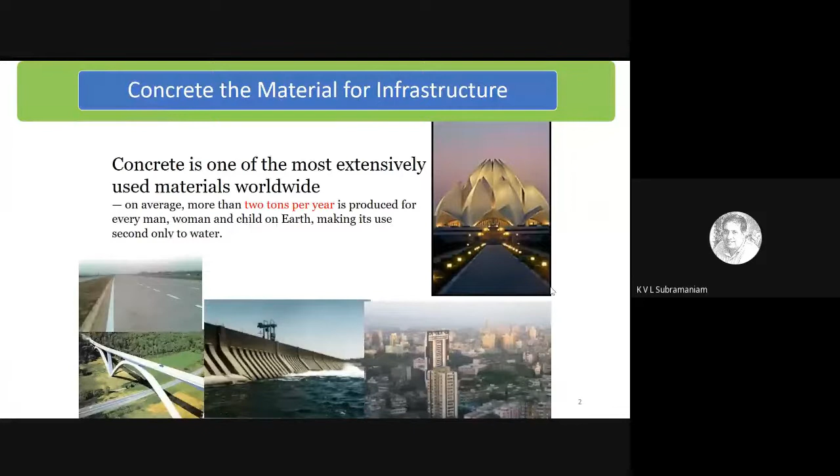Basically, if you look at concrete, it's everywhere. The usage of this material is more than 2 tons per year for every human being on this planet. So it is second only to water. So this is a material that we have to produce. We have to continue to produce in order to sustain our growth of infrastructure.

Now, oftentimes when we talk about cement and concrete, these two terms are used in an interchangeable manner. Even in civil engineering literature, it's not unusual to see cement and concrete being used interchangeably. But we have to realize that cement is, of course, only a component of concrete. We have aggregate also that come into play. And of course, now even admixtures make up a good chunk of concrete.

And if you actually look at it, cement only makes up about 7 to 15% of the total mass of concrete. But it is the most key ingredient because this is that one ingredient that is responsible for strength. It is responsible for all the durability properties of concrete. So a little perspective on cement. We are not new on the scene. We think we've invented the world, but we have not.

Romans had quite an advanced technology of cement. To this day, we don't know if it was done in a scientific manner, by trial and error, or if they basically stumbled upon it. But the Roman concrete, as we are starting to look into the historic structures built by the Romans, basically has a very similar composition to what we are using in modern concrete. They were using hydraulic cements, which would react in water, set, and basically give the properties.

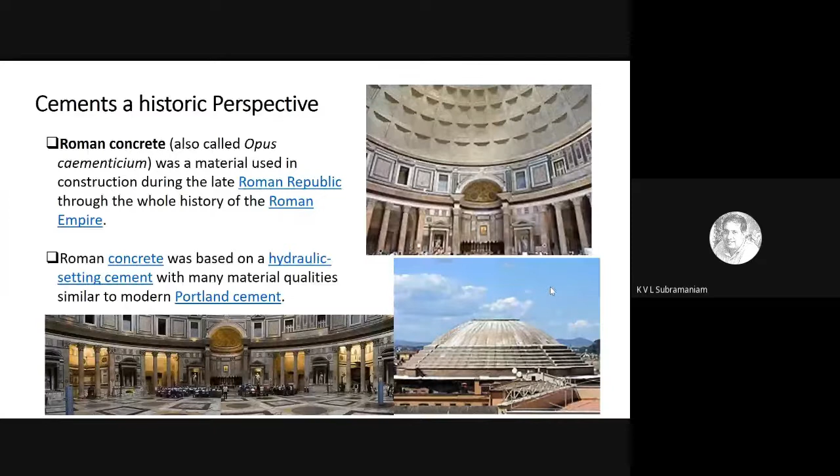So they basically had mastered the technology, and for almost 2000 years, nothing much happened. In fact, if anything, we slipped backwards in terms of cement and concrete. And the other thing that we keep coming across in terms of utilization of waste materials is the Roman concrete. They used aggregate, and they also had mortars. They had a binder, and they also came up with this term pozzolana, which has become very common in usage today.

It has been traditionally used even in India. Practically everything that was built up to almost 100 years ago was made with lime mortar.

It's a very simple chemistry here. You take limestone, which is basically calcium carbonate, and heat it to 1000 degrees, essentially calcine it. That breaks up into calcium oxide, which is what we call chunna or lime powder, and you mix it with water. That turns into a paste, which is calcium hydroxide. When that reacts with carbon dioxide in the atmosphere, it gives off calcium carbonate. So you start with a rock, and you end up with a rock. What happens is you apply this lime between bricks or stones, and as it hardens and forms calcium carbonate, it binds these materials together.

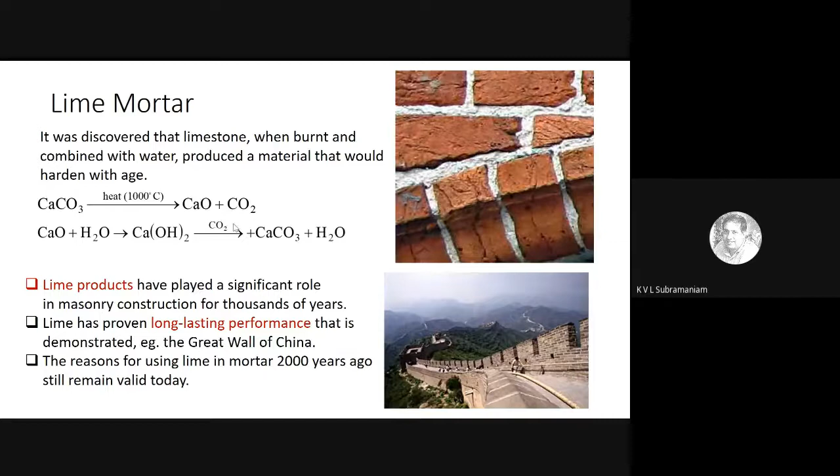Again, if you look at lime mortar, that's a calcium product. So the two things we have to pay attention to are calcium and silica. These are two important elements that we need to pay attention to when talking about cement.

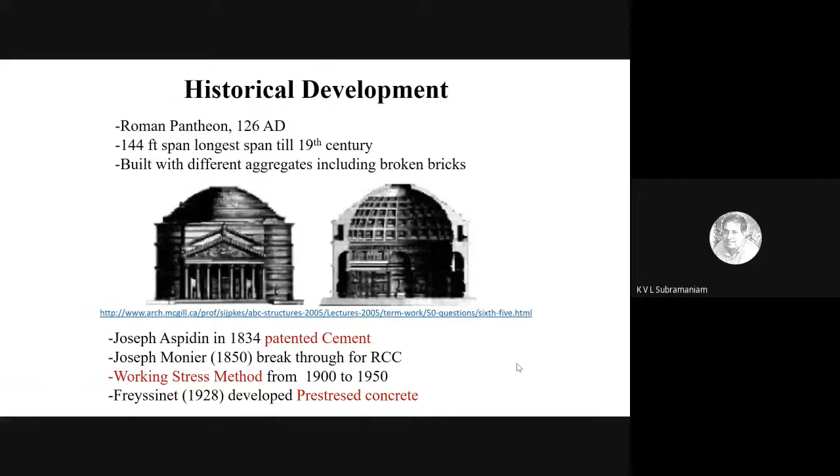Now, if you look at the historic development of cement, we look back to the Roman Pantheon, which is 126 AD, and some other developments that have happened. But the first systematic procedure for making Portland cement was patented in 1834 by Joseph Aspdin. Then, of course, subsequent developments happened while we were able to make cement and concrete. By the time design methods came about, that was in the early 1900s, and now we are able to take it further with the use of pre-stressed concrete. So these are all the developments that have happened with the use of the material.

Now let me talk a little bit about cement manufacture. We need to understand the chemistry of this material. If you look at modern cements today, primarily they are calcium oxide and silica. These are the two prime ingredients in cement.

Calcium oxide typically makes up about 60 to 70%. Silicon oxide, and I'll just loosely call it silicon oxide—we'll see later that we need to understand really what this silicon oxide is—makes up anywhere from 20 to 25%. So these are the two primary ingredients that make up modern cement. The calcium and the silica keep coming up again and again. Even in modern day cements, it's calcium and silica, and the primary components are calcium silicates in cement. So basically, cement chemistry is all about understanding calcium silicate chemistry.

Now, as I had mentioned before, in the manufacture of cement, if I have to produce a calcium silicate, I need sources of material that can give me calcium and silica. This has not changed, so if you look at limestone, it's still the source that we use for calcium.

This is similar to what was used in lime mortar for 2000 years. Silica comes from sources like clay, which basically brings in the silica. So these are the two raw materials which bring in the calcium and the silica that are needed to make cement, so that we can produce a calcium silicate material.

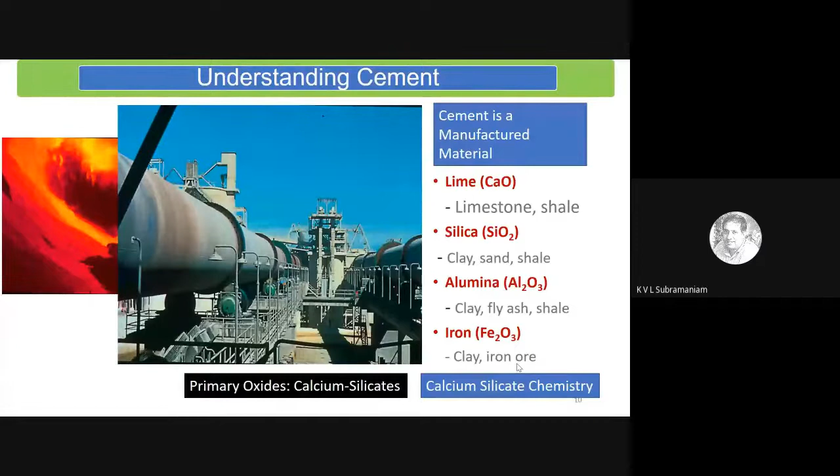The manufacture itself requires heat and energy, similar to what was done with lime mortar. You have to free up the calcium from the limestone. The cement manufacture takes place in these rotary kilns, which are massive drums. I'll show you photographs of these. The raw material, limestone and clay, is added into a hopper, and the material comes into this kiln. I'll show you what is happening in the kiln in the next slide.

If you look at limestone and heat it up, it gets calcined, a process similar to what we did with lime mortar. It breaks up into calcium oxide, giving me the calcium I need for making cement. I also add clay as my other raw material, which brings in the silica, alumina, and iron elements, the three primary elements that come from the clay.

As I heat the calcium oxide and the clay together, the calcium fuses with the silica, and I get calcium silicate. Because I also have alumina and iron, I get calcium aluminate and calcium aluminoferrite phases. These are what we call Bogue compounds in cement chemistry. What comes out is clinker, which is then ground with gypsum to produce cement.

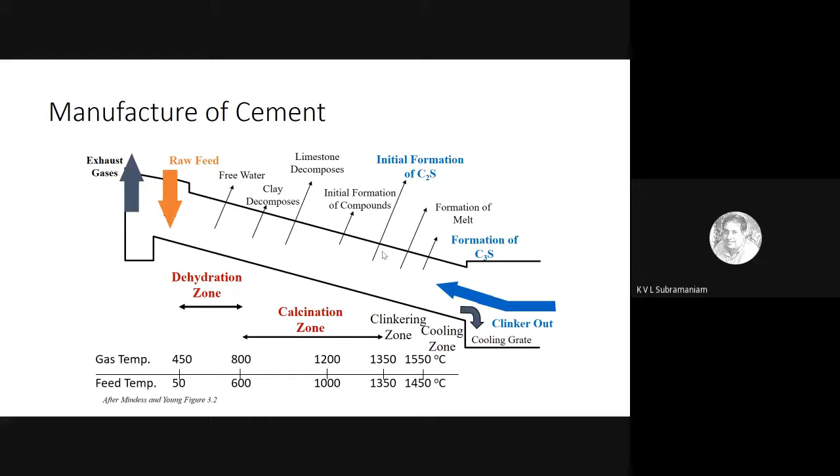Then the limestone decomposes, and I get calcium oxide. As the charge starts moving forward, the calcium oxide and the silica start fusing. At around 1200 to 1350 degrees Celsius, I form C2S, which is dicalcium silicate. Tricalcium silicate is formed at a much higher temperature, close to about 1450 degrees Celsius. So I get these primary silicates, C2S and C3S, that form as the charge moves forward through this drum, and eventually the clinker is discharged at the opposite end of the drum.

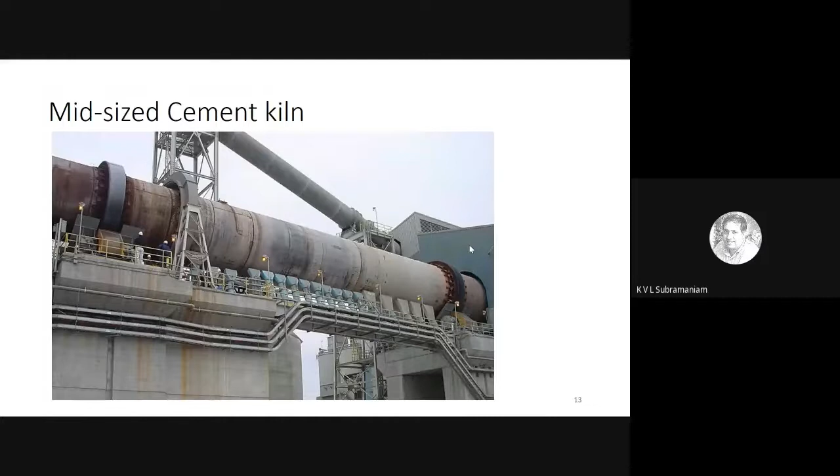So now one of the ways some of the waste material is being disposed of is happening right in cement manufacture itself.

Similarly, biological and hazardous waste is also being used in incineration to produce the temperature. So in the production of cement itself, a lot of this hazardous and waste material disposal is already happening.

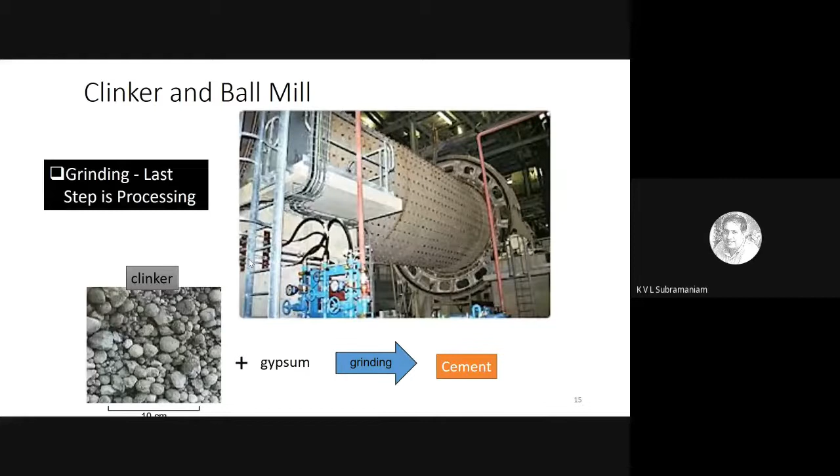Now after the kiln, what comes out is clinker, and you see the clinker is basically in the form of these nodules, grayish stone-like material, which is then ground in a ball mill to produce a very fine material, which we call cement, this grayish powder. In the grinding stage is where we add gypsum to produce cement. What comes out as cement is this grayish powder, the ordinary Portland cement, as we call it.

It has an average particle diameter of anywhere from 10 to about 20 microns, or micrometers, and a very high surface area. There's a whole science into the grinding process, achieving these sizes, and the role of particle size in the reaction of the cement.

Now just a quick touch on the embodied energy. If you look at the energy used to produce cement, how much energy do I have to expend, and compare it with other materials, actually OPC doesn't look so bad. If you compare it with aluminum, which probably has the highest embodied energy because the electrolysis process used to produce aluminum is very, very energy intensive, it has a very high thermal energy requirement. Even steel is high.

The OPC that we talk about is actually not so bad. While it is an energy intensive material, it is not as bad compared to other materials. That's one of the things one has to think about when discussing the sustainability of this material, because with all said and done, compared with other construction materials, it has probably the lowest embodied energy.

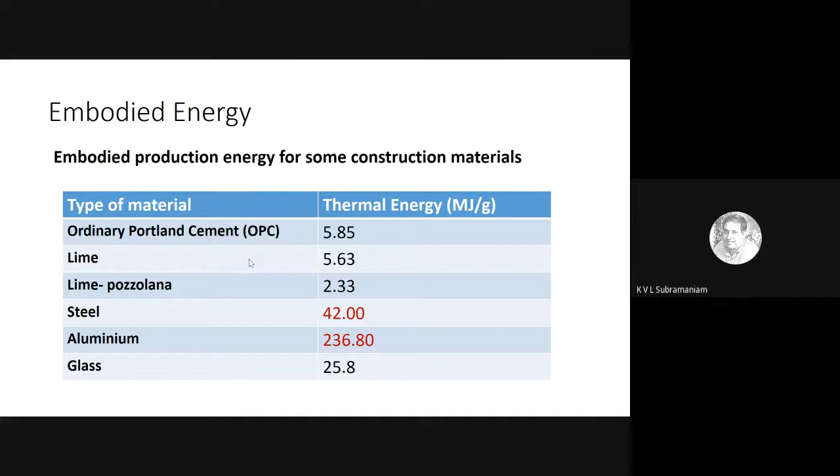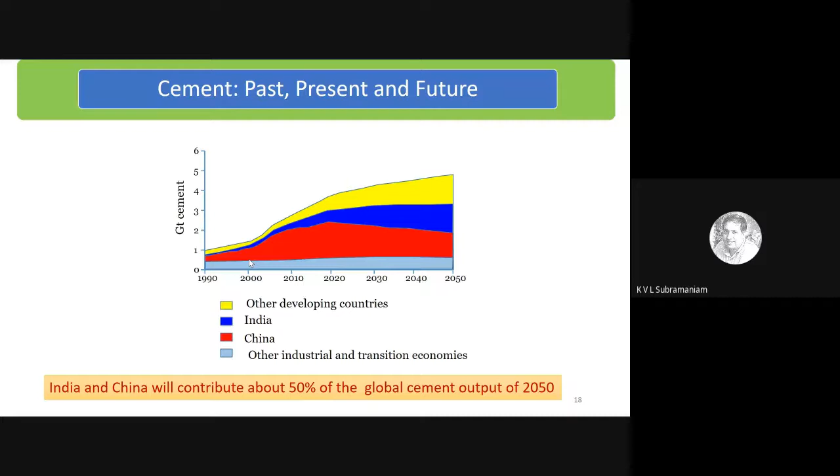Now, the blue there is India. India right now is the second largest producer of cement, and if you project forward to 2050, it will likely be the largest producer of cement. That is a projection based on our requirement of cement for infrastructure. As we are planning to grow our infrastructure, we'll need a lot of cement, so we have to be able to produce the kind of cement to sustain the growth of our infrastructure.

Now, what are the challenges with cement production? With the anticipated requirement of 750 million tons per annum in 2050, our current available reserves of limestone are expected to last only about 35 to 40 years. This is the grade A limestone, the best quality limestone currently used in making cement. That's only going to last us 35, 40 years, which means we have to look for alternatives.

So we have to look at reducing the amount of clinker in cement, because clinker is the one that comes from the use of these raw materials. Although the energy requirement of cement is less compared to other construction materials, given the large volume in which cement is required, we have to address the energy issue and the carbon footprint. It is the second or third largest anthropogenic source of carbon dioxide. We have to address this issue.

So to make any improvements, first we have to go back to the basics. Let's look at cement hydration and cement chemistry. The two primary compounds responsible for most of the properties in cement are the calcium silicates, tricalcium silicate and dicalcium silicate. These react with water in a reaction we call hydration to give calcium silicate hydrate, and a lot of lime or calcium hydroxide is released in the process.

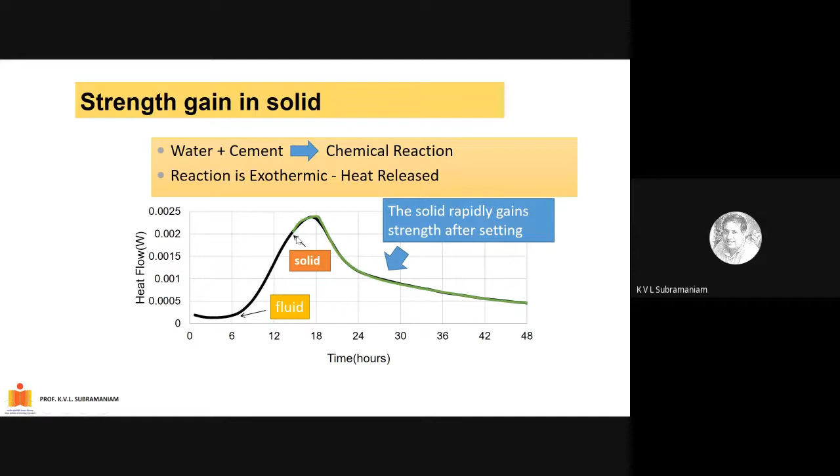In fact, they go down in size to a few nanometers and fractions of nanometers. So you get these small water-filled capillaries which go from nanometers up to micrometers. With time, as more and more cement reacts, water is consumed, and the capillary pore space starts decreasing.

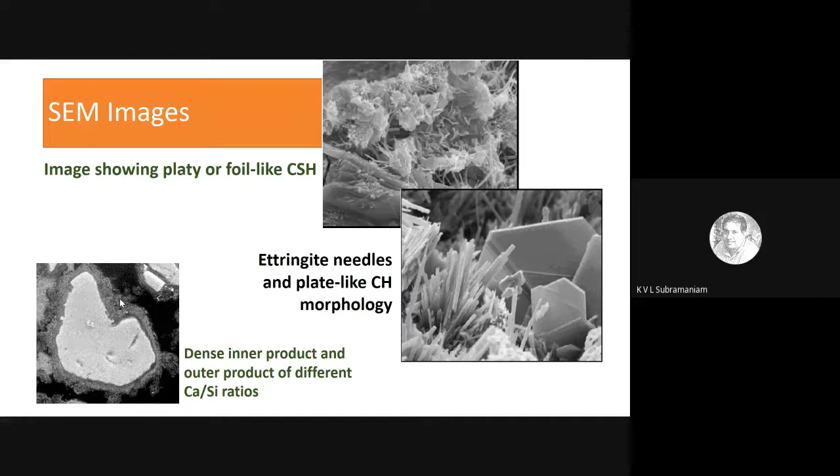If I sample the calcium silicate hydrate close to the cement grain, it will have a certain composition. If I sample it away from the cement grain, it will have a different composition. And the way it is packed also varies. This has enormous implications on the final strength, the final properties of the hydrated cement, and also of the concrete. So a quick touch on supplementary cementitious materials.

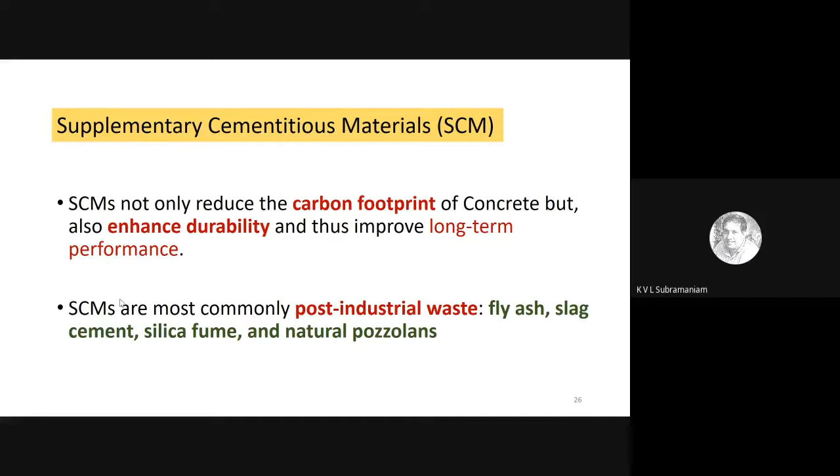Now, because we are trying to reduce our requirement of cement, we started exploring supplementary cementitious materials, which are primarily derived from post-industrial waste. The supplementary cementitious materials most commonly used today are fly ash, slag, and of course silica fume, and these are all waste materials.

Now, what is fly ash itself? I'll cover this in a little more detail in the next few slides. It's basically what we get when we burn coal, the ash that is left behind. This is the ash that is collected from the stack, what is coming out of the chimney. It's carried by the flue gas, it's in the form of fine dust, and it's collected using electrostatic precipitators.

The way we use these supplementary cementitious materials is in a cement system. I have my cement reaction between the calcium silicates and water, which leaves a lot of lime. So we look at these supplementary cementitious materials, which are primarily sources of silica. Whether it is slag, fly ash, metakaolin, or silica fume, all of these are rich in silica. So these bring in the S element in the reaction.

Because the cement hydration leaves CH, which is calcium hydroxide, if I bring in a source of S, silica, in the form of either fly ash or slag, that would consume this CH and give me additional CSH. And this is what we call the pozzolanic reaction. So again, it goes back to having a system which has calcium and silica, and we are bringing in additional silica from these materials.

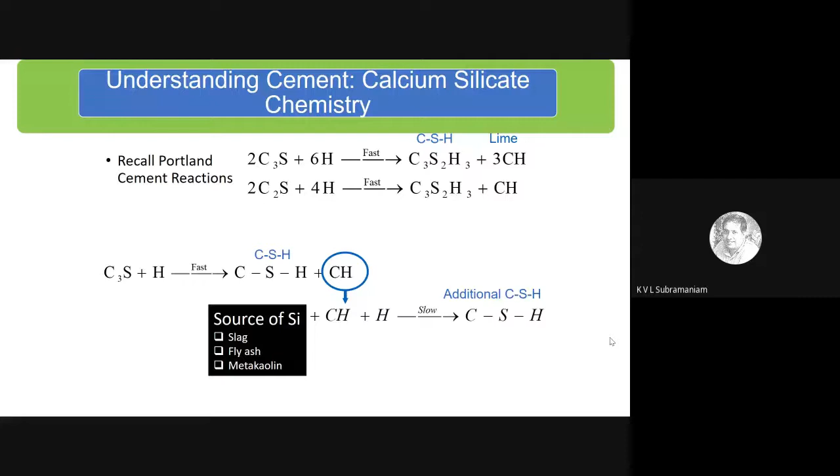And fly ash, if you look at its oxide composition, depending on the coal that is burnt to make the fly ash, contains a variable amount of silica, SiO2. That is the primary ingredient we count for when we are looking to replace cement with this material. Now, slag is another supplementary cementitious material that is made from waste.

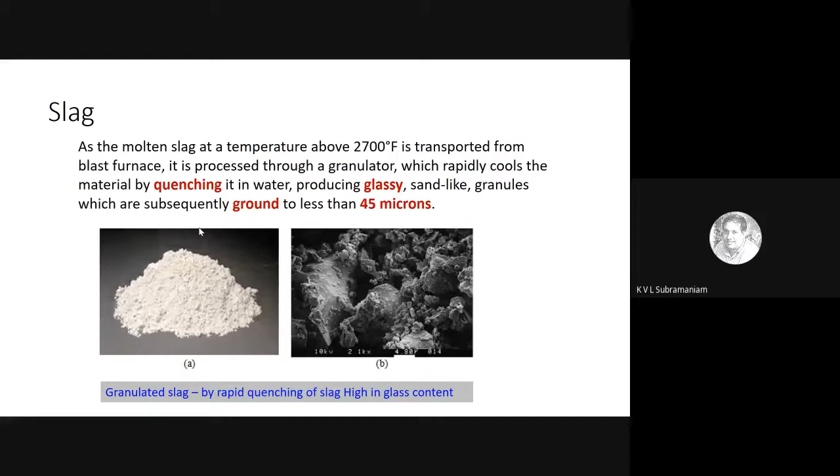It is basically the gunk that floats on top of the molten iron. That material is at a very high temperature of 2700 degrees Fahrenheit, about 1500 degrees Celsius, and it is cooled or quenched very quickly to give a glass-like material, which is then ground to a fine size to produce ground granulated blast furnace slag, which we use as a replacement. Again, this is very rich in silica, so it's primarily a source of silica.

Then we have silica fume, which is a byproduct of the reduction of high quality or high purity quartz in an electric furnace.

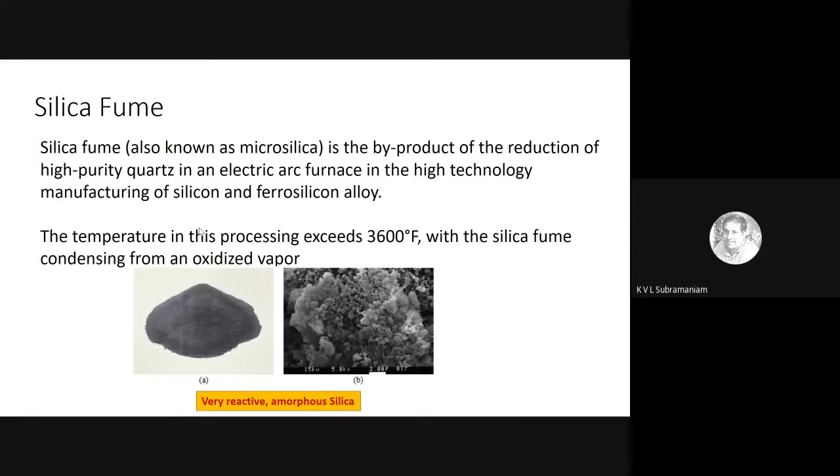Silica fume is used in the high technology manufacture of silicon or silica chips. It is very rich in silicon or silica, and it is again used as a supplementary cementitious material.

Metakaolin comes from calcining clay, and as we already know from our understanding of cement production, clay contains silica. So when I calcine it, I'm basically creating a source of silica in the system. And again, it can also be used as a cement replacement.

And the whole point is that the calcium hydroxide that is produced from the cement hydration is then used up by the silica that is coming from these materials to form additional calcium silicate hydrate. So that is the whole principle of this utilization.

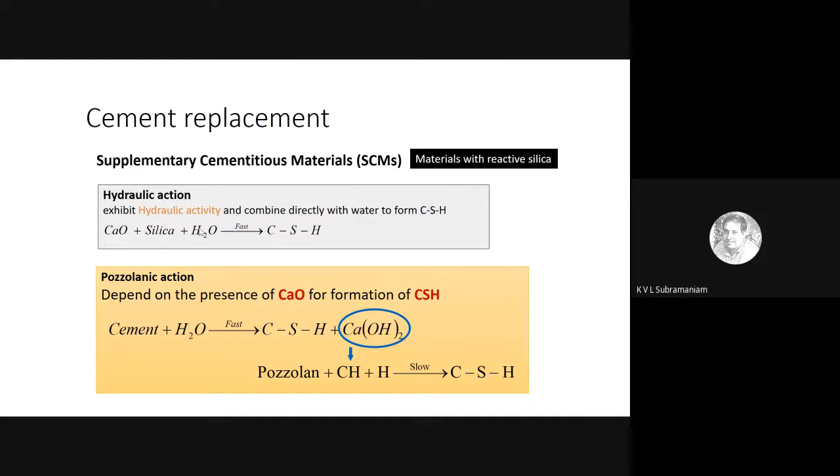And using this, we have been able to basically replace the clinker content in our cement with this post-industrial waste. And remember that fly ash and slag and silica fume, these are all waste materials produced by other industry. Therefore, they are post-industrial waste materials. We've been able to find uses for these materials in cement, primarily as a clinker replacement.

But I want to, at this point, develop an understanding of forms of silica. And this becomes very important in order for us to understand how effectively we can replace cement with these materials. Because we are primarily trying to replace the silica component, because these materials are bringing in silica. And we should be aware of what forms silica takes.

Now, if you look at silicon, it exists in oxide forms, and we are aware of different forms of silicon oxide. And one of the forms is quartz. Quartz is nothing but sand. It is our natural sand. And quartz is one of the most inert materials known to man.

It does not react. But at the same time, silica is also present in cement. It is also present in the supplementary cementitious materials. And somehow we know that this silica is able to enter into the reaction, which means that it is not inert. It is in a reactive form. So we have to learn to distinguish between the oxide forms of silica, and that takes us into silicon chemistry and silicon oxide forms.

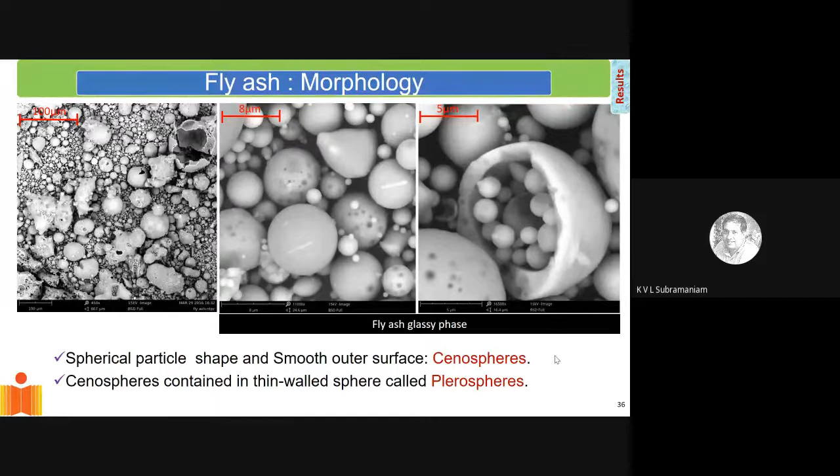Now, I'll illustrate this with fly ash. And I know you had a lecture yesterday given by Dr. Bhagat Singh, where he probably would have talked about fly ash in detail. I just wanted to illustrate with fly ash the different forms of silicon that exist, and we should learn to distinguish the reactive form of silicon.

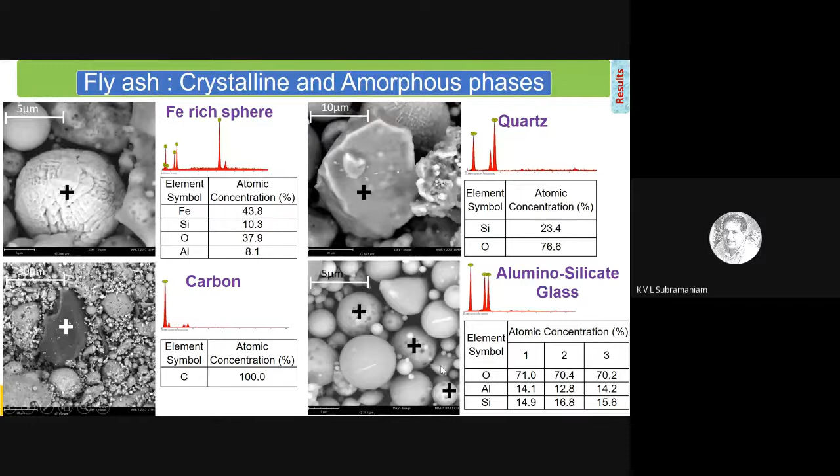So if you look at fly ash, quartz, under a scanning electron microscope, would have this nice crystalline form. It is basically silicon oxide, but it is an inert form. But if you look at this aluminosilicate glass, which is shown in the form of these nice spheres, this also contains silicon. But this form of silicon is in a reactive form.

Now, I just want to show you what we did with characterization of fly ash. We collected fly ash from different sources across India, and we did an oxide analysis. Oxide analysis is done by a technique known as XRF, X-ray fluorescence spectroscopy, which indicates the oxides that are present in any material. And when you look at the oxides, you find that across all these fly ashes, the silicon oxide, SiO2, and the alumina, Al2O3, are almost identical. There's very little difference between these.

And there's very low lime content in our fly ashes. So basically, if you look at the primary oxides in these fly ashes, the silicon, the aluminum, and the iron oxide make up about 70% of the fly ash. But if you remember, silicon exists in reactive and non-reactive forms. So to identify the reactive and the non-reactive forms, we have to resort to X-ray diffraction spectroscopy.

And so if you do XRD, which is X-ray diffraction spectroscopy, one can learn to distinguish between the amorphous and the crystalline materials. If you look at an XRD signature for a raw fly ash, it would have all these peaks that show up. The peaks are produced by crystalline materials that are present in the fly ash.

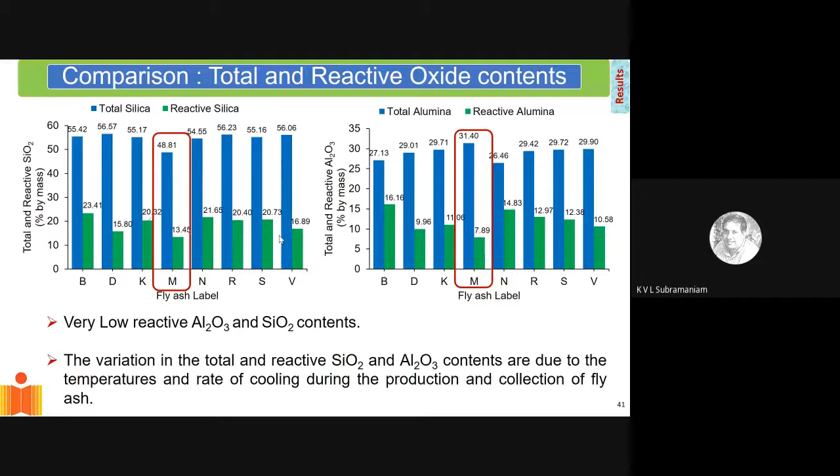So if I take fly ash or any supplementary cementitious material, I need to identify the amount of silica present in this reactive form. Then I can start looking at cement replacement in an efficient manner. Just to reiterate, material characterization is very important. If you give me any material and I want to use it in cement chemistry, I have to look at the primary ingredients in terms of its oxides.

When it comes to primary ingredients, I'm primarily interested in calcium, because it's calcium silicate chemistry. And I'm interested in the silica, but I need to identify the form of silica. I'm interested in the reactive form of silica, which can then be used to form calcium silicate hydrate, and that is the strength-giving material of cement.

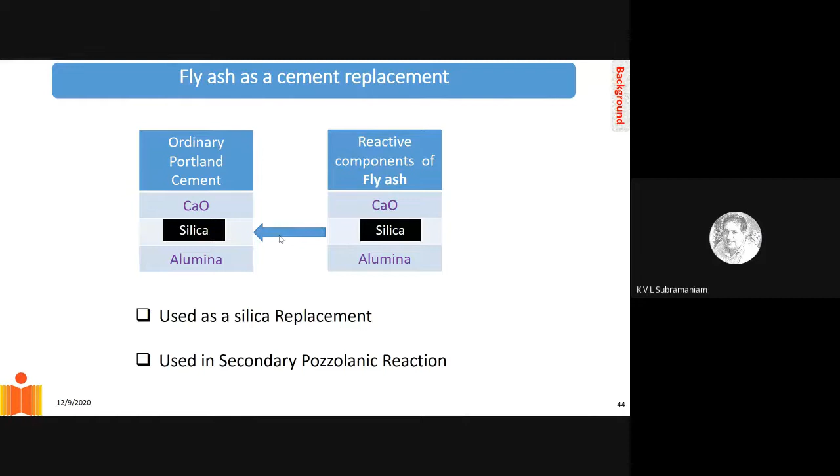It may contain some calcium oxide, and it may also contain some alumina. But primarily, we are looking to replace silica in the cement with the silica that is coming from the fly ash. Now, for me to do an effective replacement, it is the reactive silica that is present in the fly ash that I can use to replace the cement. So if I add, let's say, 1 kilogram of fly ash, only a small percentage of that will be available in the reactive silica form. So only that much percentage is an effective replacement of cement. And that is what we need to figure out.

So basically, when I'm replacing cement with fly ash, I may gain some silica into the system because fly ash is bringing in silica, but of course I lose the calcium component, because cement is primarily calcium silicates or calcium aluminate. The calcium that is coming from fly ash is very small, so the calcium content decreases. And basically, I lose out on the calcium silicate hydrate that the cement I'm replacing would produce. So net, I have to figure out what is the total gain and what is the total loss.

And for characterizing that, look at these numbers. Suppose I look at 20% replacement, and I'm giving you a numerical example. If you look at cement, shown on the table on the top, cement contains 3% alumina, 15.76% silica, and about 71% of calcium. When I replace 20% of the cement with fly ash, and I'm only showing the reactive components, the fly ash in this case gave 21% reactive silica by its mass. It had 11% alumina in reactive form and only 1.92% calcium.

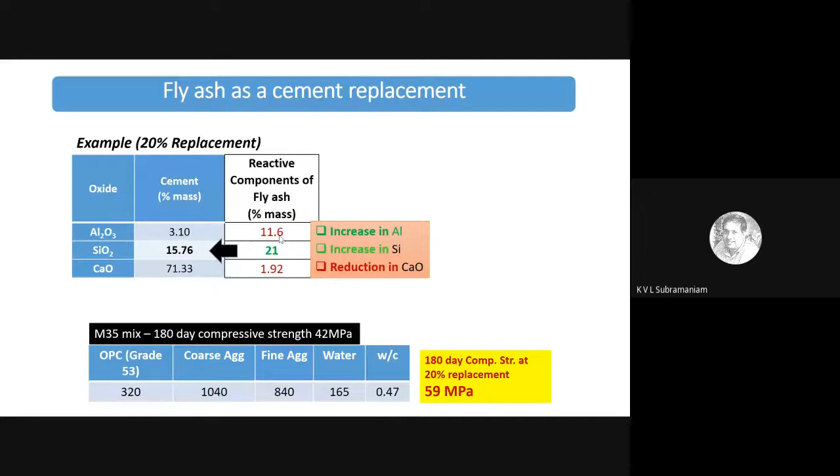Now, we developed an efficiency factor for optimizing the replacement, which is a metric for replacement. The efficiency factor itself is based on an understanding of the Arrhenius type reaction. But the way the C efficiency that I've shown here works is that to develop an optimal replacement, the idea would be to achieve the same strength as what I would without using the fly ash.

We just saw in the previous example that if I do only 20% replacement of cement with fly ash, I can actually improve the strength, because while I lost some calcium, which went with the cement, I brought in more silicon. And remember that a cement system is a calcium rich system because a lot of calcium hydroxide is produced. So net, I was able to produce more calcium silicate hydrate in the system, which gave higher strength.

So with this efficiency factor, the point would be to achieve an efficiency factor of 1. If I achieve an efficiency factor of 1, then I have the optimal replacement level of this material, based on the reactive components this particular fly ash is bringing into the system. So the maximum cement substitution with any of these post-industrial waste materials would be based on achieving an efficiency factor of 1, which would give me the same strength and performance as using pure cement.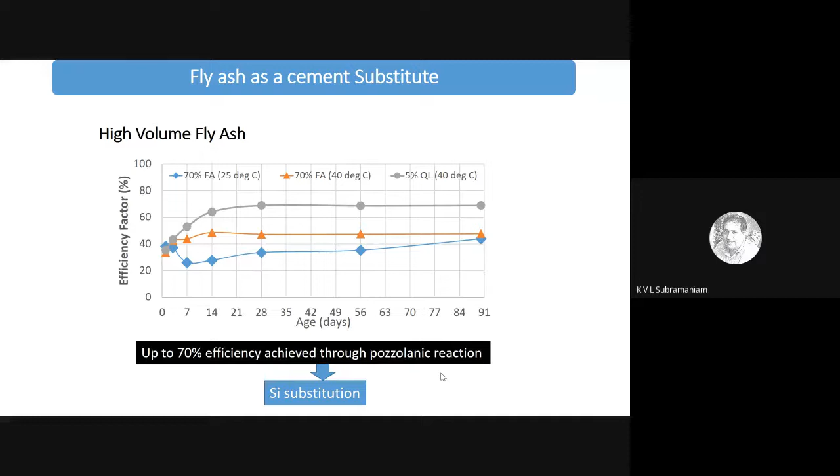So that means you can only maximum achieve 70% of the strength using a pure cement system.

Similarly, we can work this out for all the other materials. Remember, most of these are post-industrial waste materials, except metakaolin, which is a manufactured material, but most others are waste derived from other industries.

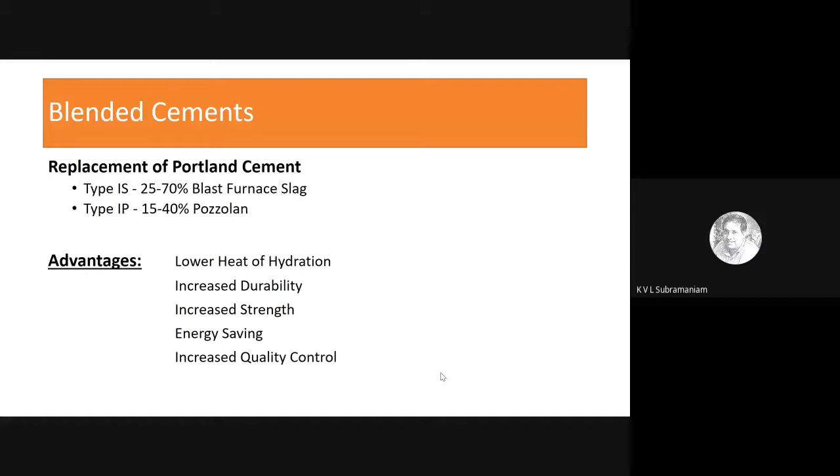With these blended cements, we replace cement with blast furnace slag and/or fly ash, relying on pozzolanic activity. These blended cements are now commercially available and have several advantages, including lower heat of hydration, increased durability, and increased strength. These are all now known and established.

This is a typical replacement chart with fly ash, where we are stuck at 40%, and with slag we can go up to 70%. So what about Portland composite cement?

Portland composite cement is produced by intergrinding or blending clinker with other cementitious materials. Where it differs from pozzolanic cements is that we intergrind slag or clinker with these materials, using multiple sources of silica or multiple materials in this intergrinding process. The replacement of clinker can go from 30 to 80%, using different supplementary cementitious materials like fly ash, slag, limestone, and silica fume, and combinations of these—we're not restricted to only one material.

There's even a BIS standard available for composite cements.

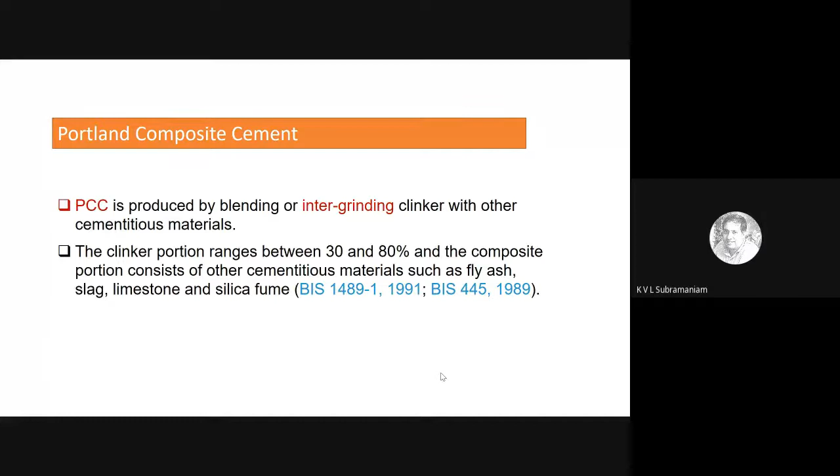Now, in the last unit I want to talk about production of Portland composite cement. I want to discuss an experiment where we wanted to make cement using only waste materials—sourcing waste materials, understanding the chemistry, and producing a cement that gives us the same calcium silicate hydrate chemistry. That was our objective. We even set up a vertical kiln.

In my first few slides I had shown a rotary kiln, which is very expensive to set up. So to demonstrate pilot scale production, we set up a vertical kiln, which is simpler to set up. It is not very efficient, which is why it's not used by the cement industry, but to prove the production process, one can use a vertical kiln.

Now, what does a kiln do? A kiln is basically a large tube that allows me to develop a gradation in temperature, and that's what this vertical kiln did. At the bottom end you have the high temperature heat source; at the top end is where you introduce the charged material. The charged material has to have a source of calcium and a source of silica. The material has to move slowly through the drum, subjected to higher and higher temperature, up to about 1500 degrees Celsius.

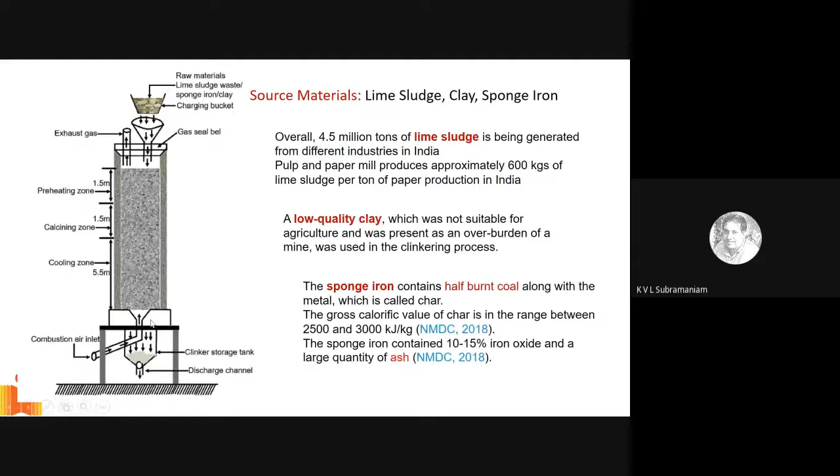And we use sponge iron. The reason for using sponge iron is it's a waste material that people are not able to utilize. It brings in iron, and we know that cement, OPC, ordinary Portland cement, contains some iron in it. But the reason for using it is because sponge iron contains a lot of unburnt coal and unburnt carbon present in it. So we were looking to extract heat from this - that unburnt carbon could be used as a source of heat, thereby minimizing the requirement of coal needed to produce the high temperature. So this was the reason for using sponge iron in the production.

So now let's look at these materials individually to make sure that they are present in reactive forms. If I look at the XRD, X-ray diffraction signature of my lime sludge, most of it is present in the form of calcite. If you see the graph, the spikes shown in maroon say that most of my lime sludge is available in the form of calcite.

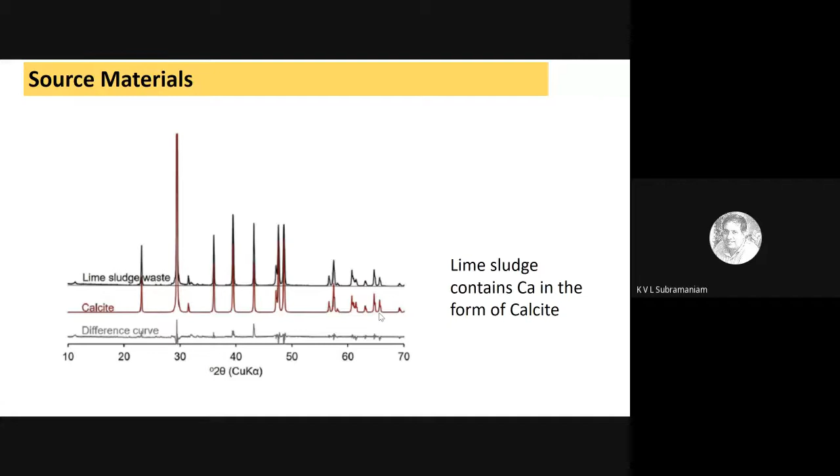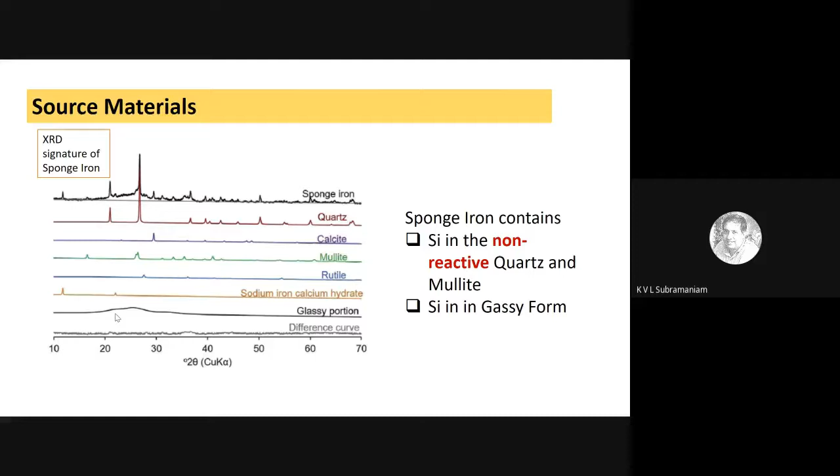If I look at sponge iron, it also contained silica, but unfortunately a lot of it is locked in the quartz form, which is non-reactive. But it also has this glassy portion, shown by the black line, which contains reactive silica. So it does contain reactive silica, which I can use as a source of silica in my system. These are the primary sources of elements that I can use in cement production.

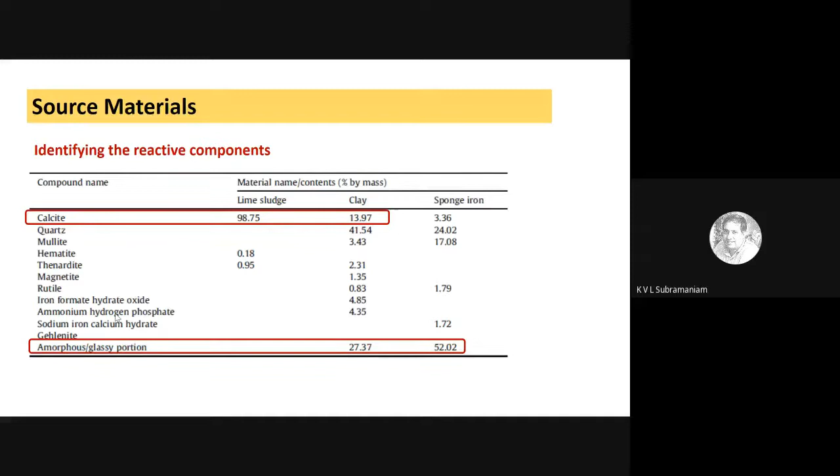If you look at the amorphous glassy portion, which I have highlighted below, which contains the reactive silica, clay contains about 27%, and sponge iron contains about 52% of this reactive silica. So I'm basically bringing in reactive calcium and reactive silica, which I need to produce my calcium silicates.

Then the clinker that we produced from the vertical kiln - when we did the chemical composition analysis of this, we were able to form tricalcium silicate and dicalcium silicate. And because there was also alumina and iron present in the source materials, we also formed tricalcium aluminate and tetracalcium aluminoferrite, the four Bogue's compounds. One has to remember that C3S, C2S, C3A and C4AF, the four primary ingredients of cement, are crystalline compounds.

So each one of them has a distinct signature in the form of peaks in the XRD signature. From our characterization, we found that our cement had about 35% of C3S and about 31% of C2S. Normal cements will have close to 50% of C3S. We were not able to produce that high level of C3S, but C2S was a little higher than normal cements, because in normal OPC we have about 25% of C2S. But we were now able to produce cements which had calcium silicates.

The next step was actually to produce the composite cement, which was to take the clinker and combine it or blend it with other materials. The whole objective is to enhance the reactivity of the system and to increase the reaction product content in the system - I want to produce more calcium silicate hydrate. For that, I have to bring in additional sources of silica into the system.

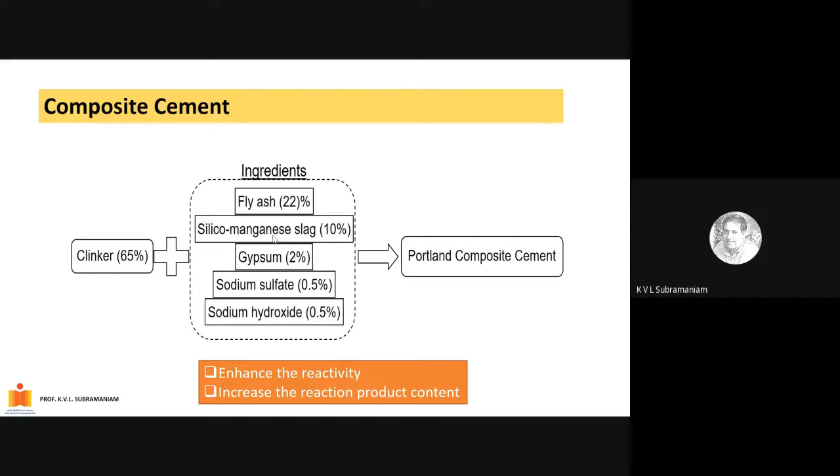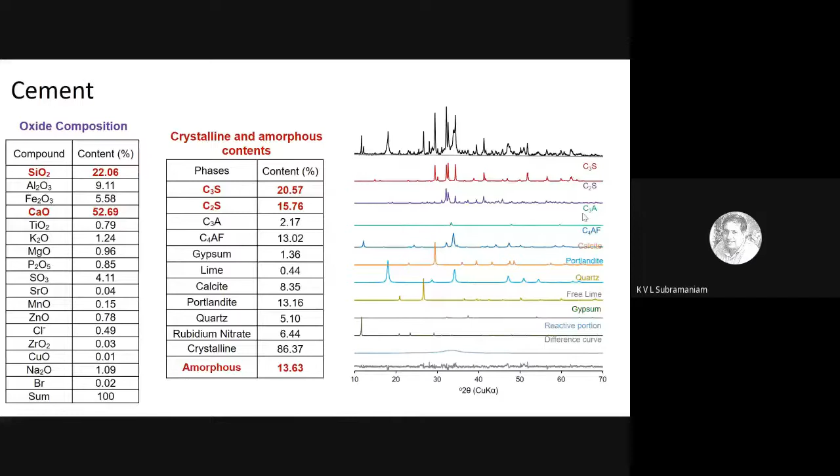So the sources of silica were assured in these reactive materials, and this is the final composition, if you look at it, for the Portland composite cement, when everything was blended together. The final step in the process is to check the chemistry, and this is basically done by understanding the chemistry.

One can get into the thermodynamic modeling of the compounds that are produced, and basically one can produce these ternary diagrams to see what would be produced in a system. So before I start blending and doing experiments, I can actually start doing numerical experiments to see what is produced in the system.

So by playing around with the different compositions, we found that for the Portland composite cement, which is shown in the middle column here, PCC, we were able to produce about 41% of this calcium aluminosilicate hydrate, which is basically the CSH that is required to be produced.

And we compared it with the ordinary Portland cement, which is commercially available, grade 43. We found that it is lower than what you get from OPC 43, but we were able to produce a higher amount of CSH in the system compared to what I would get from pure clinker. So therefore, the composite cement actually would give us a higher strength when compared to pure cement.

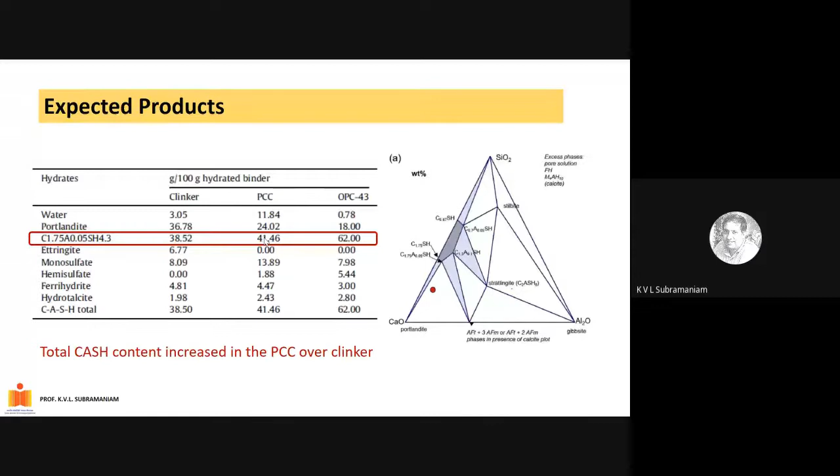And using this approach, we were actually able to optimize how much fly ash and how much slag needs to come into the system. So with this, I just wanted to conclude that we were actually able to achieve compressive strengths which started matching what you would get from OPC 43 grade cement at 91 days. It's almost catching up with it.

In fact, when we looked at results that we got at 180 days, the strength that we got from the PCC, the Portland composite cement, was higher than the OPC 43. And the OPC 43 that we used was a commercially available grade 43 cement.

So what I want to stress through this whole exercise is, by understanding the raw materials and understanding the chemistry, we can start producing cements using exclusively waste materials. What we did in this exercise was, by understanding the chemistry of the raw materials, utilize 100% waste materials and produce a cement that does give us strength.

Then, by playing around with the chemistry, we were able to optimize it to achieve the desired properties and the strength that is required to meet the commercial needs, where we can start matching what is already commercially available.

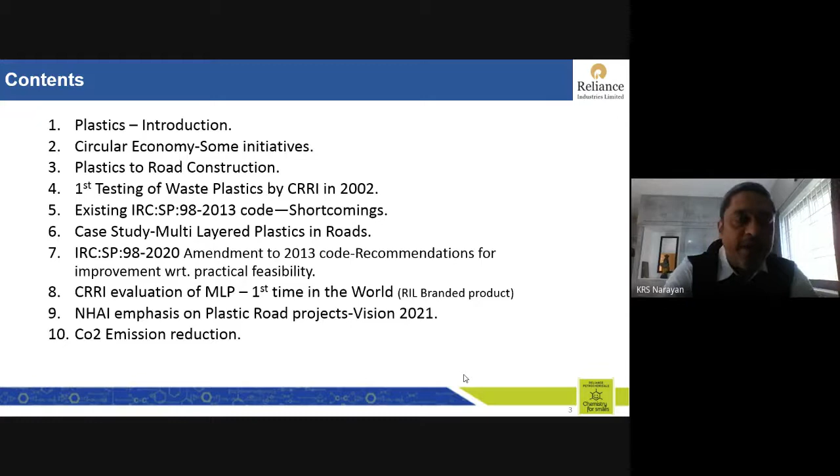I would also talk about the amendment, where we are a part of the committee to amend and provide recommendations for improvement with respect to practical feasibility, because practically civil engineering is quite different from the theory which we study in our books. Then the CRRI evaluation of the multi-layered plastic, for the first time in the world. And then the NHAI emphasis on plastic road projects, Vision 2021. And last but not the least, the carbon dioxide emission reduction, which I'm very, very fond of.

Plastics, yesterday. Plastics was just invented in 1862. It's a relatively very new material to be used by mankind, though there are materials such as metals, glass, and so on, which have been used for a very long time. And this is an excellent substitute for scarce, precious natural resources. It has gained popularity because the other materials are getting depleted, and substitution is commonplace. Plastics has offered an excellent cost-economical substitution.

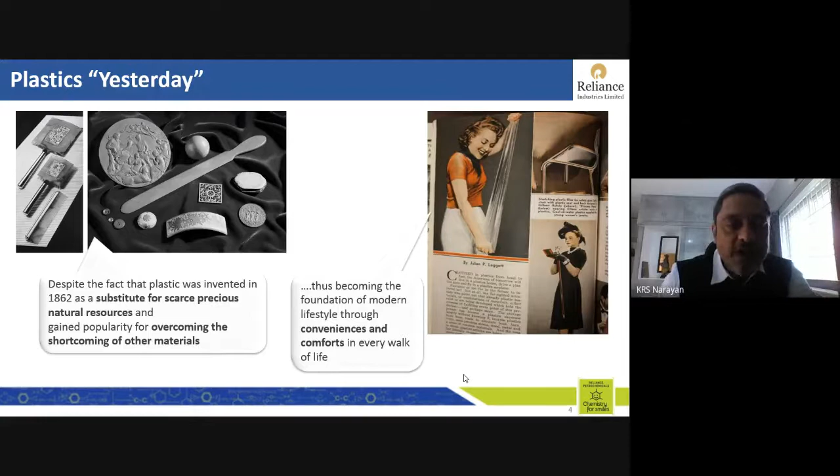So this has become the foundation of the modern lifestyle for conveniences and comforts in every walk of life. Everywhere in this world, plastics are used extensively as substitutes to various other materials, and also as a cost-economic solution. Can we really imagine a life without plastics? Today, as we speak, we are working with a plastic instrument called a computer. The body is made of plastic. We have a mobile phone without which we cannot live. It's made out of plastic. We have automobiles which are made of plastic. There's a lot of things.

For instance, the water bottles are made of plastic. Then the packaging. Why is plastic packaging extremely important? Because it is one material which makes the dry material stay dry and the wet material stay wet. So this is a very innovative invention by mankind. Plastic packaging as well as plastic products have become an indispensable material on earth today. Each and every common household would have a sufficient amount of plastics. Almost 60 to 70% of the household consists of plastics in daily use. So we just cannot imagine a life without plastics. You cannot replace these plastics with metals and glass.

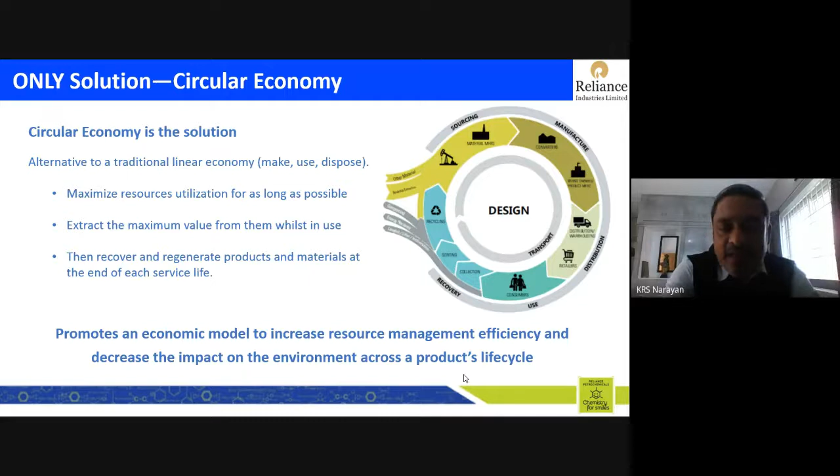Let me get into types of plastics, because all of us know cement, concrete. Civil engineers are very, very knowledgeable on cement and concrete. I'm going to take you through about 5 minutes on what plastics are. We have rigid plastics, which are thermoset material. And we have single layer plastics, which are carry bags and so on, and then multi-layered plastics, which are flexible plastics. So we have only two types of plastics, rigid plastics and flexible plastics.

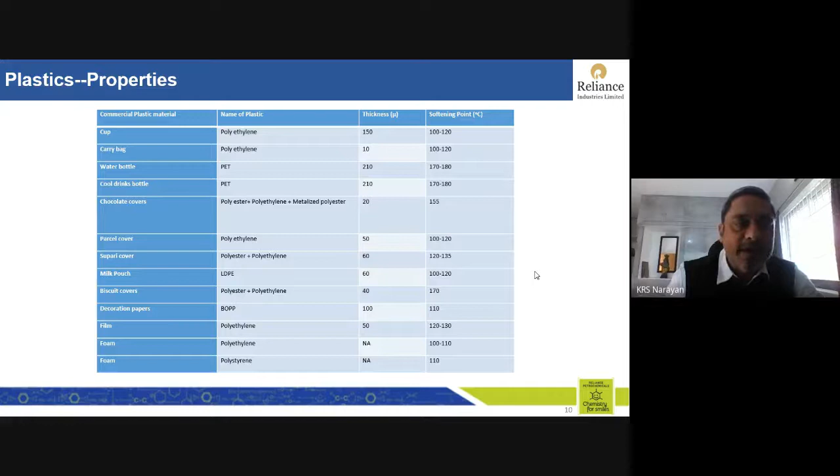Now let me come to multi-layer plastics. Multi-layer plastics is a material which has ended its life. Basically, these are all the films that are used for packing of foods. Then you have stretch films used for wrapping bottles, etc. And then we have multi-layer films used for packing shampoo, detergents, and other items. So these are all the plastics which have already had their end of life.

So we are trying to provide solutions to the end of life, or else these form a part of the littering, as well as the incineration, as well as the landfill. We know very well that rigid plastics or PET bottles have a very good resale value because they are completely recyclable. But multi-layer plastics have no value.

For example, if you have a kabadiwala who comes to pick up plastics, he would prefer to take PET bottles because they have an excellent resale value. But these small packaging materials, which are multi-layer plastics, have no value for him. So he will not be picking them up, and these will be littered in any place. So this is what we like to work with, to establish its use in road construction.

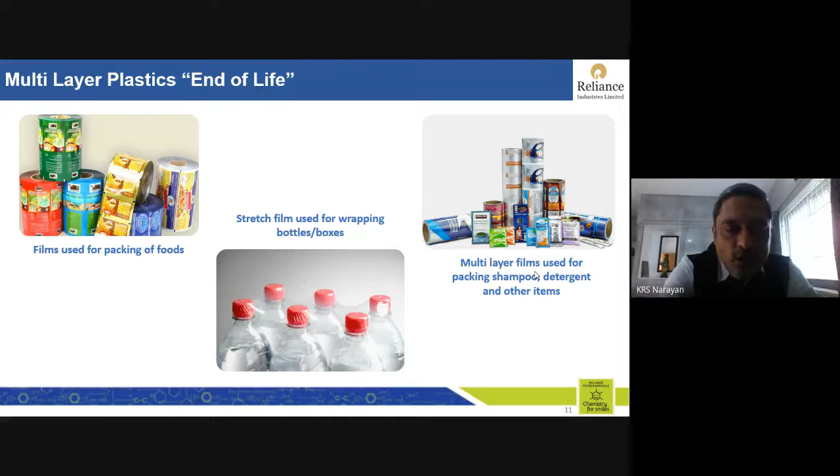Multi-layer plastics have outlived their reuse, are difficult to recycle, and mostly end up in landfills. They consist of carry bags, plastics, biscuit and chips wrappers, etc. And they are difficult to collect. As I said, the kabadiwala, the raddi fellow, will not collect these materials because they don't offer any value to him. So he'll discard these, and they become littered on the roads.

Generally these materials are not picked up, are littered, and then get to the landfill because the local municipal body or corporation picks them up and sends them to the landfill, where they get incinerated, or perhaps go to the cement plant for use as fuel for the kilns. These are also very good because they are all binders when heated to high temperatures, and there is no evolution of toxic gases at this temperature. So multi-layer plastics are good to use for various applications.

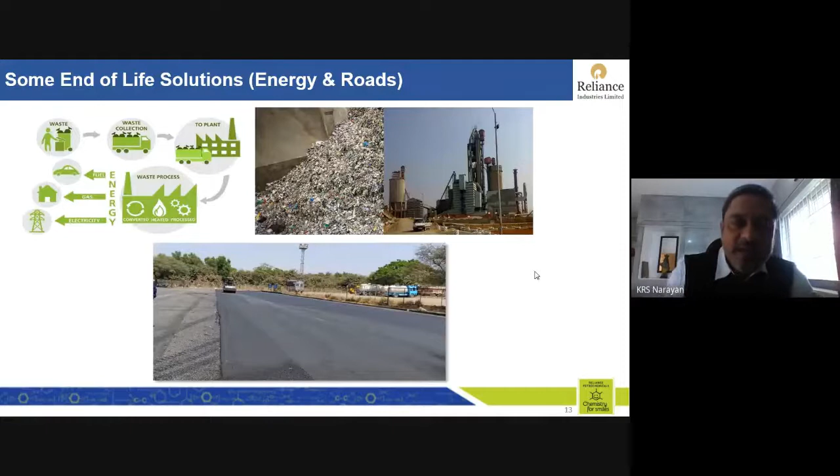Some of the end of life solutions are energy and roads. For energy, many cement plants have been taking this multi-layer waste plastic in all types of forms. It is collected and transported to the plant where it is used as fuel to ignite the kilns, and the energy is used for the manufacture of cement. The second end of life solution is road construction.

There are some serious issues on durability of roads. Let me come to the durability part. So far, I have addressed the plastics aspect, the types of polymers, the various types of plastics, as well as end of life plastics such as multi-layer plastics. Durability of roads: cracks are inevitable. Every road has a crack. The life of the road depends on the amount of cracks.

So these are all inevitable because of the poor quality of construction, poor choice of materials, and the mix designs. I'm not coming into mix designs, so on and so forth, because I would like to rest this presentation only with the use of multi-layer plastics in road construction. As a concept, this was done a couple of decades back in Madurai. This is the first road which was done.

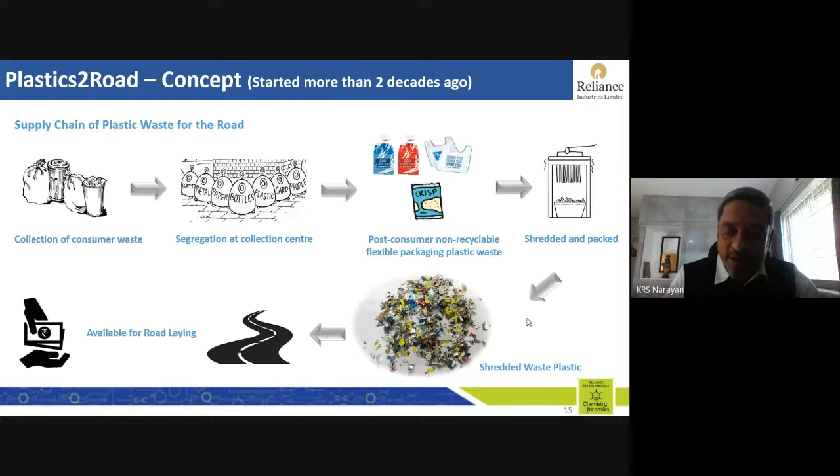Why should we use shredded waste plastic? Plastic acts as a very, very good binder. As I said, 120 to 130 degrees Celsius is the softening point. There's no evolution of toxic gases at this temperature. It consumes all types of multi-layered plastic, which are currently not recycled. So it provides an excellent end-of-life solution to littering as well as landfill and incineration. The challenge, however, lies in collection and segregation of what is frequently littered.

So all types of flexible films with thickness less than 80 microns can be used, as per the government policy. All types of packaging materials, multi-layer packagings, are less than 100 microns. 80 microns is an average one which you can pick up. Advantages: you can improve the quality of the road, durability and fatigue life of the road. Plastic roads have a higher resistance to deformation and to water-induced damage, because the plastic coating on the aggregates acts as a water barrier, preventing water entering the pores or spaces between the aggregates. Improved stability and strength.

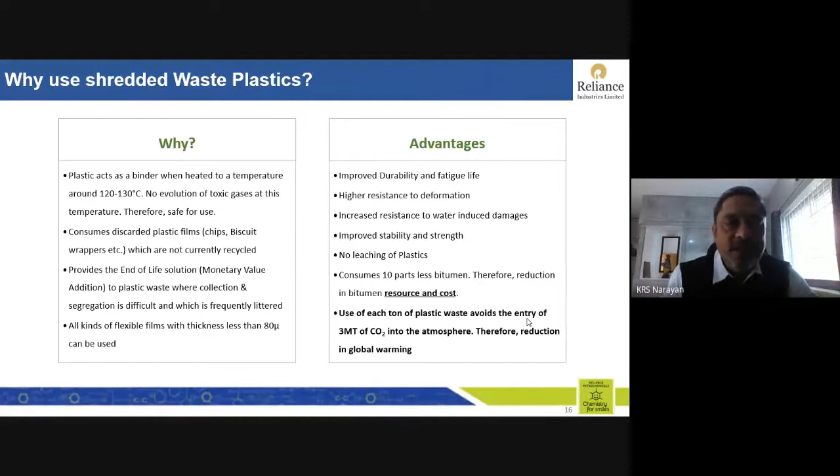The Marshall stability is higher. No leaching of plastics. 10% of bitumen can be reduced. That's dependent on the mix design, so I would not advocate that at the moment. It depends on the mix design. And each ton of plastic waste avoids the entry of 3,000 kgs, that is 3 metric tons of carbon dioxide into the atmosphere. So there is a reduction in global warming as well as in carbon emissions. So these are the advantages, how and why we should use shredded waste plastic.

The operation is basically, as I said, you have to segregate it, and then you have to shred it as per size. This is a very, very cheap process. You will get a shredder within one or 2 lakhs of money. You can shred up to 2 to 3 metric tons per day with these shredders. So they are shredded as per the specification, which is important because the size of the aggregate is very, very crucial for the performance of the road.

So when the size of the aggregates is around 10 to 15 millimeters for the top 30 mm bituminous coat, you need the specification to be around 5 mm, less than 5 mm of shredded plastic waste, such that it is able to coat at the temperatures which are warranted at the drum mix plant.

So when the aggregate is conveyed through the conveyor, the plastic is also dispensed, and it gets coated during the melting process. Once it is coated, after a few minutes, the bitumen is added through the bitumen dispenser to the plastic coated aggregate, and then the final mix is transported to the site and laid at 110 to 120 degrees Celsius with a 10-ton roller.

The most important thing is it's easy to use plastics. It's available in a shredded form, and it's very, very easy to use them.

But the biggest challenge towards the 20-year concept not taking off so easily is basically because of the collection of waste. We still do not have a great collection system in the country. However, throughout the world this is being addressed, and today in India, with the Swachh Bharat mission in place, we are trying to address the collection of waste.

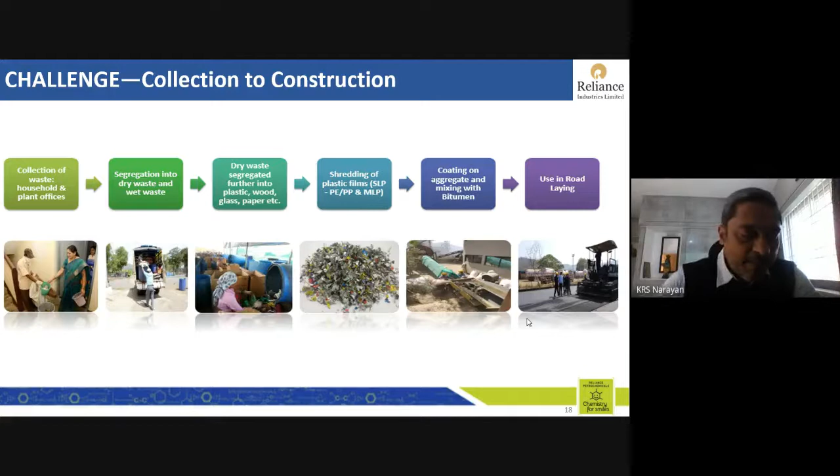So this is the most important thing which we are trying to address. The Swachh Bharat Mission is trying to address it by making presentations with all the regional bodies throughout the country, with every city. And we have certain cities who are role models today.

Indore is a role model in plastic to roads. They have an excellent collection system, and we all know very well Indore has won three times in a row, the best and cleanest city in the country. So there is a lot of activity happening there, which is being replicated in other cities also.

Let me get to CRRI testing. This testing was done 18 years back on carry bags. Carry bags are no more prevalent because the country has banned their use. This was the first of its kind research work carried out by the reputed institute CRRI, because the Government of India, the Ministry of Roads Transport and Highways, and the Ministry of Surface Transport depend on the testing of materials to be used in roads by CRRI.

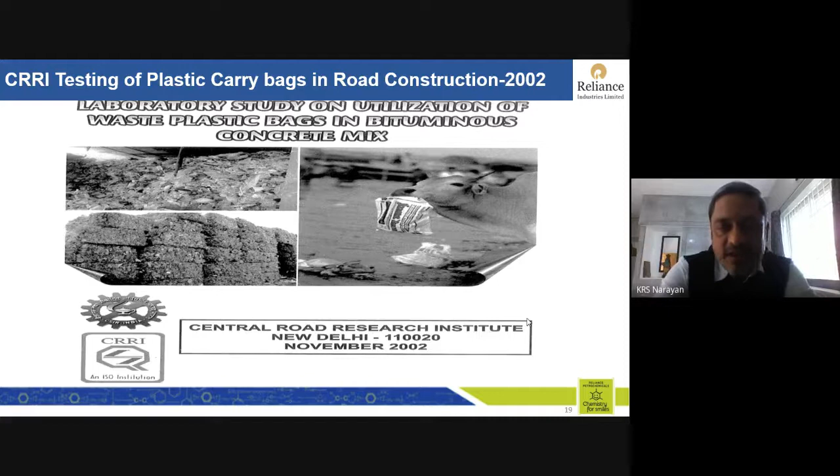CRRI did an extensive study on waste plastic bags in bituminous concrete mixes, which were procured from a supplier, then shredded at the plant and mixed at this ratio. This material is also available on Google—you can search for CRRI testing of waste plastics in 2002 and get the entire presentation from there. So these were the testing parameters set for shredded waste plastics for road construction.

There were a lot of impurities, so the waste plastics were cleaned, because these carry bags contained wet waste also. They were cleaned, dried, and then shredded. These were all single polymer, not multi-polymers—only polyethylene or polypropylene, because most carry bags are made of polyethylene and a little bit of polypropylene.

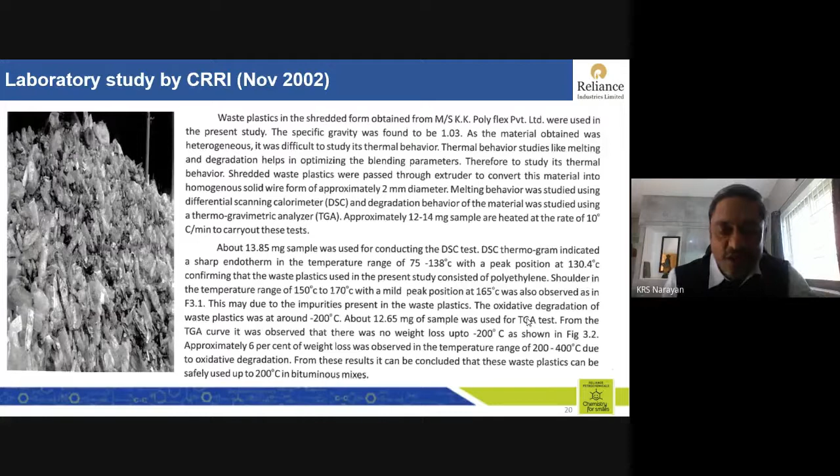So these are very, very easy to use materials. All you have to do is collect it, shred it, and use it for roads, because the softening point is around 120 to 125 degrees Celsius. So it's very easy to use carry bags, but at the moment we don't have carry bags in place, so we only have to deal with multi-layered plastics.

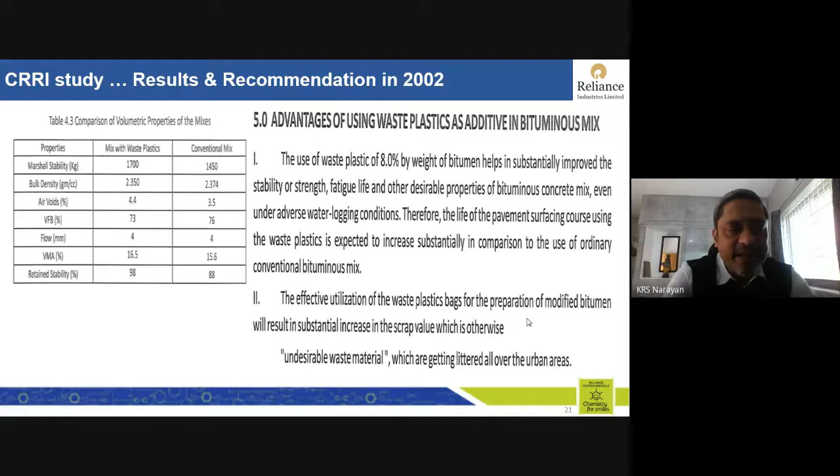The results and recommendations: the use of waste plastic at 8%, which was fixed as the standard, and based on which the codes were arrived at. This 8% substantially improved the stability, the fatigue life, and other desirable properties of bituminous concrete mix under adverse waterlogging conditions. On the left side, the table shows the improvement in the Marshall stability ratio—a substantial increase. The most important thing was the retained stability, which was very good with waste plastic. So it was decided that waste plastics provide a lot of advantages to road construction methods, as well as a material.

It was actually a material which could be recycled, which could also add to the durability. So it was very desirable to use shredded carry bags as a mix material in road construction. With this, the IRC SP 98 code came about.

This is the code, with the 2013 version, which governs the use of waste plastic in hot bituminous mixes. From 2002 to 2013, there were a lot of efforts, and a lot of legends who worked on that. To name a couple: Dr. Veeraraghavan from IIT Madras, Dr. I.K. Pateriya, and Dr. Sunil Bose, who was convener of the committee. CRRI, the entire team, worked day and night to put up this concept of plastic roads.

Many rural roads have been built with plastic roads. People were very certain that the plastics were giving a lot of advantages and benefits to improving the durability of the road. Then the committee was formed to give a guideline for the use, and the IRC SP 98 2013 code was derived.

Specifications as per the IRC SP 98 code state the plastic material should conform to a size of 2.36 mm, passing the 2.36 mm sieve and retained on the 600 micron sieve. So you will have a material which is only 2.36 to 0.6 millimeter in size, almost like a grain of sand.

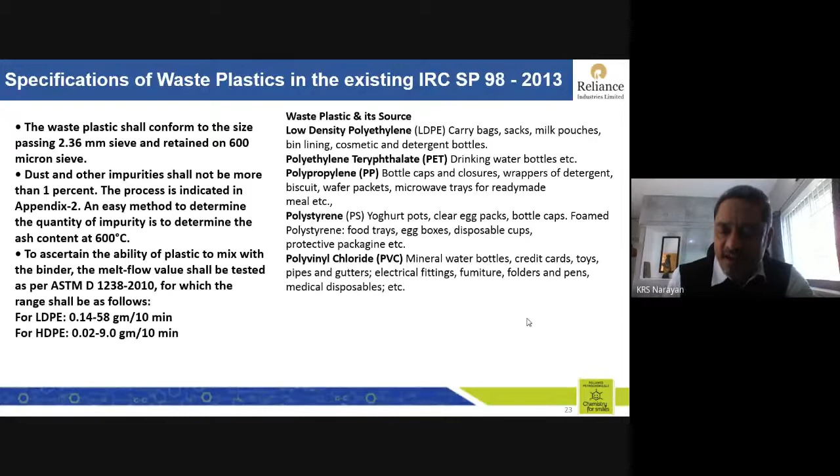And I could see a lot of places where the plastic roads had failed, basically because of the poor quality of raw material which had gone into it, because this code was very vague. Challenges and bottlenecks for adoption of that code: the code mentions the shredded waste plastic should melt at a temperature of 160 to 175 degrees Celsius.

Carry bags are again banned now. Presently, only multi-layered polymer plastic material is available. Multi-layered polymer plastic generally has a composition of different materials, as I said, multi-polymer, multi-material, that is polypropylene, polyethylene, PET, aluminum, paper, etc. So the melting points vary from 135 to 265 degrees Celsius. PET, which was mentioned as PET bottles that can be used in the 2013 code, does not melt at this temperature.

Because we are one of the largest polymer companies, petrochemical companies in the world, we have a very, very strong laboratory which analyzes all types of polymers. And we found that PET was not melting at all.

The temperatures at the point of addition of the shredded plastic - I did a lot of work traveling to many drum mix plants throughout the country. What had happened was, when I went to these drum mix plants, the conveyor belt was discharging the aggregates into the drum mix plant, but I did not find any drum mix plant at the time of entry of these aggregates maintained at 150, 160, 175 degrees Celsius.

At most of the plants, I carried a pyrometer with me to every site of every big contractor throughout the country, and I could find the temperatures were a minimum of 200 to 250 degrees Celsius. Some plants where I put my pyrometer inside, it was 275 degrees Celsius.

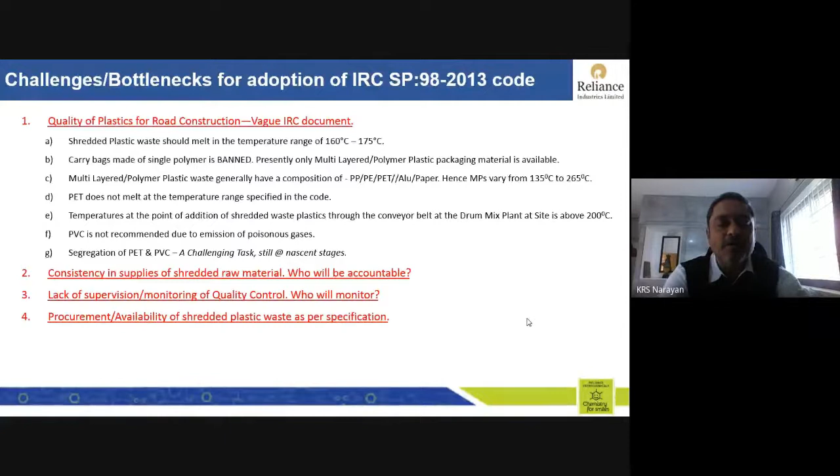The government had mandated in 2008 and then it mandated in 2017 that plastic waste has to be used within a 50-kilometer radius of a city. But how many cities had definitely used these? Not very many used it because of the non-availability of the correct quality of plastic waste to be used in roads. I will touch upon the case study which we did because this is a multi-layered plastic.

For the first time in the world somebody has done real strong work on multi-layered plastic. So multi-layered plastic is a very new concept in the world, and we are working with several foreign bodies to determine what multi-layered plastics are to be used in road construction. This was a sustainability initiative of plastic waste management, Reliance Industries. We did two major projects at Nagothane Manufacturing Division, that is NMD. Nagothane is one of our large plants, located around 100 kilometers away from Mumbai.

So this was a 40-kilometer road which we did completely with shredded multi-layered plastic as per the specification. So what we did was we made sure that all the employees were contributing to this initiative. By the way, we had 75,000 employees working in our Reliance Corporate Park in Mumbai. So we had so many employees who were accessing foods such as chips and biscuits and chocolate. We ran a campaign that everybody put it inside these bins.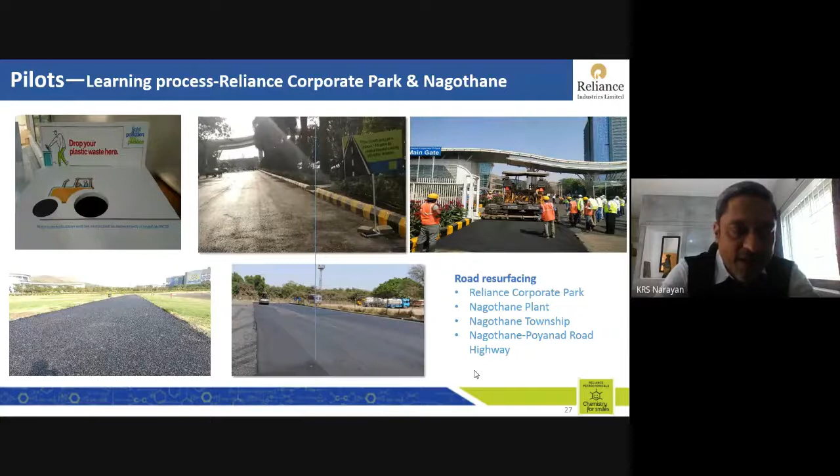Then we took it and employed a shredder vendor, who shredded that material, and we employed the exact techniques of IRC and laid all these roads in Nagothane. We did it inside the plant, we did it in the township road, we had a Poyanad Road highway which is maintained by the National Highways. We did that road also, along with our corporate park and the helipad which is being used by the chairman. So we wanted to be very, very sure that whatever we do with multi-layered plastics is beneficial to the company, and, with the help of all the testing and standards, largely beneficial to the society as well as for the country.

Tests which we did, all these basic tests, I would not dwell too much on these tests: basically aggregates, tests for bitumen, tests for site samples. All these tests were conducted with due diligence, and then we arrived at data. So for every 1 cubic meter of concrete, the density of the mix, 2.43 tons of the weight of mix. This is available; I can provide these details.

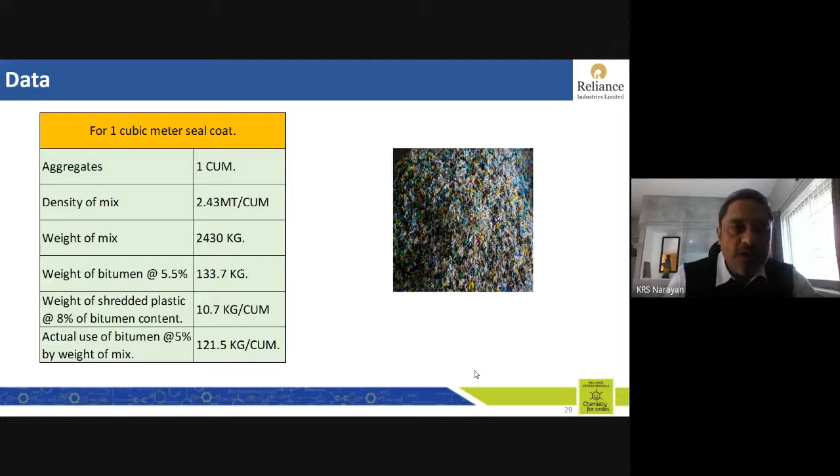We added 5.5% bitumen and 8% of shredded waste plastic. So we reduced the bitumen content by 10%, and still maintained 5% by the weight of mix as bitumen. And then 8% of waste plastic as per the IRC code was used. And then the road was laid as per the procedure here. The plastic enriched bituminous concrete, 30 millimeter thick, used for the top wearing course alone. We do not advocate that waste plastic should be used in all the layers of road construction. We are using it only for the layer which is susceptible to the environment and to the traffic conditions.

So we sorted these waste plastics into different materials. We classified polyethylene and polypropylene material from the multi-layered plastic. With our extensive research and knowledge in polymer engineering, we found that PVC was not available in multi-layer plastic. So multi-layer packaging films did not have PVC, and a very small amount of PET. So we analyzed the polyethylene and polypropylene inside it, and we shredded to those sizes mentioned. And whatever PVC waste was also coming through, the external waste, was eliminated.

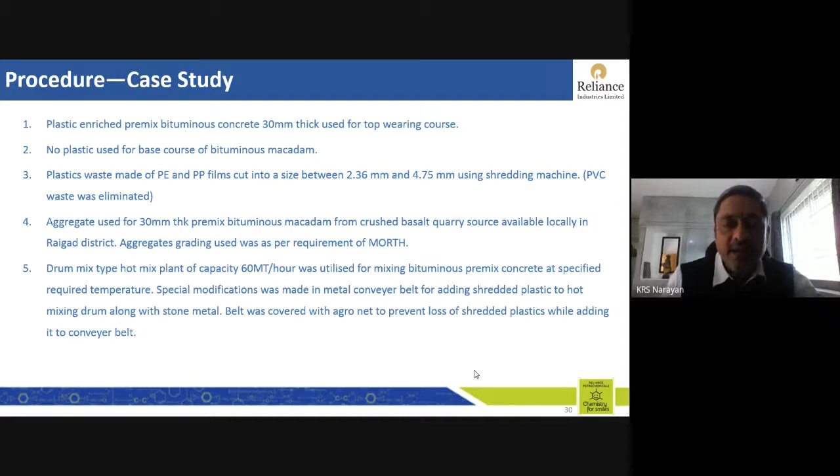So the aggregate used was locally sourced from Raigad district, as per the requirement of the MORTH standards. A drum mix capacity of 60 metric tons per hour was utilized for manufacturing the plastic coated mix, and then the mix was transported to the site conventionally, as road contractors do, and the temperature was maintained between 120 and 140 degrees Celsius.

So before laying, the existing potholes were filled by using this material itself, and then the top surface was laid. A tack coat was then applied at the rate of 0.5 kg per square meter by using a mechanical bowser. And then the spreading of crusher dust was followed by cold rolling, ensuring 100% sealing. So we adopted all the principles used by the road laying contractors.

So we did that. And then after a couple of years, we found out that it was improving the durability of the road. Basically, because this is a plant which sees close to 150 to 160 trucks every day, of minimum 35 metric ton load capacity. And they were all turning. They were all 10-wheeler trucks transporting naphthalene, monoethylene glycol, and polyethylene terephthalate. So there are a lot of materials which were being transported on a daily basis to the plant.

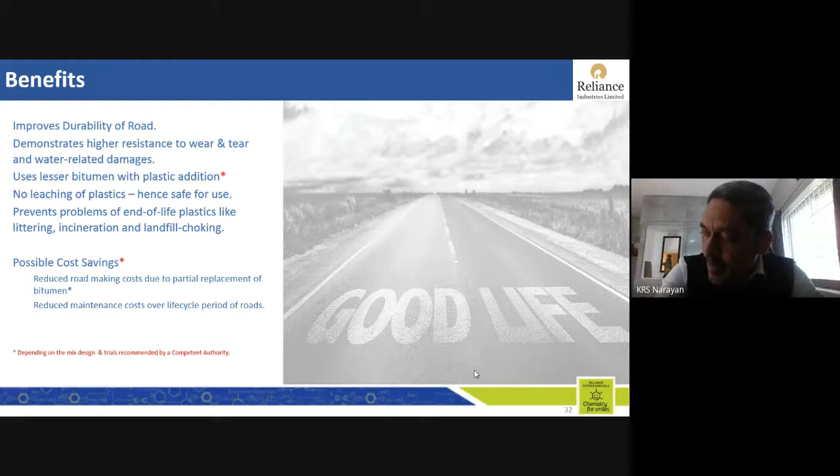They're very heavy duty trucks, and the rainfall is enormous. Let me tell you, if you people manage to come to Raigad district, you will see the heaviest rainfall. Though I have not gone to Cherrapunji, I have gone to Raigad, which has around 350 centimeters of rain every year. That's only during 3 months of the year. The monsoon is between the mid of June to the mid of September. So you will have 350 centimeters of rain.

So we saw the actual use, because every year the roads were being relayed again and again after the monsoon. So we did this to ensure that we have a practical feel about the performance of the road after a year or two. So what has happened is, we managed to ensure that the plastics are actually having a solution. The end-of-life plastics got a solution, and because our township was generating a lot of these multi-layered plastics, we found great use to it. And then we used it for the durability of the road itself. So we had a partial replacement.

I think there is a caveat in it. It has to be approved by the competent authority. The mix designs have to be carried out. The Marshall Stability Index has to be carried out. The tensile strength and the compressive strength have to be carried out to ensure that there is a replacement of bitumen with plastic. So that is left to the competent authority to approve. And since it was our own in-house project, we took a decision that we will use 10% reduced bitumen. So reduced maintenance costs over a life cycle period of roads.

Sample study: we covered 15 kilometers of the first thing which we had complete control of, in the sense that we had the financial statements with us. So we were able to save close to some 81,000 rupees per kilometer. So apart from providing a solution to the multi-layered plastics, apart from providing a solution to the durability of roads with respect to the non-occurrence of potholes after 2 monsoon seasons, we were also saving 81,000 rupees per kilometer. So this is a win-win situation, because we have a win-win-win ratio in this.

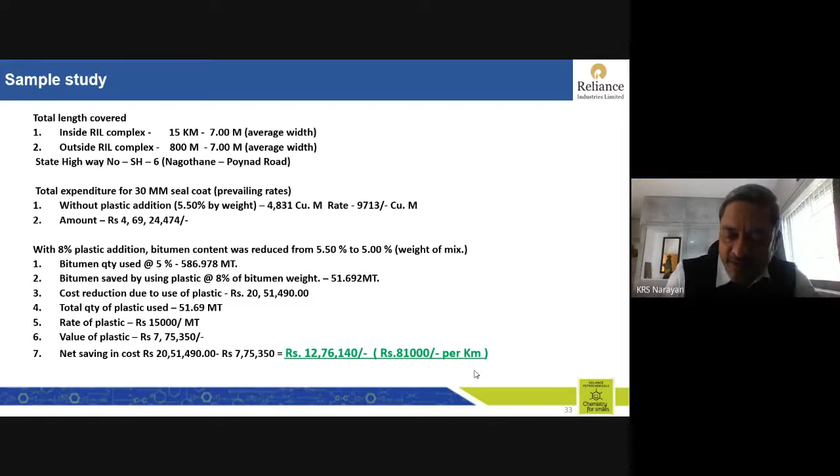So I personally feel, unless we give a cost economic solution which is highly technically worth it, it's going to be very, very difficult for people to use technology or products in the construction field. We all know very well, when you go to the contractor, first thing they ask is, kitna bachta hai? First thing. So this is a big problem. Like COVID, it's a pandemic in the mindset of every contractor in India. Mujhe kitna bachta hai? So this is the most important thing which we thought we should derive, such that this also becomes profitable for the contractor, so that there is large scale usage. Any technology will find large scale usage only when you start showing, apart from technical benefits, cost economical benefits also. We were able to demonstrate that.

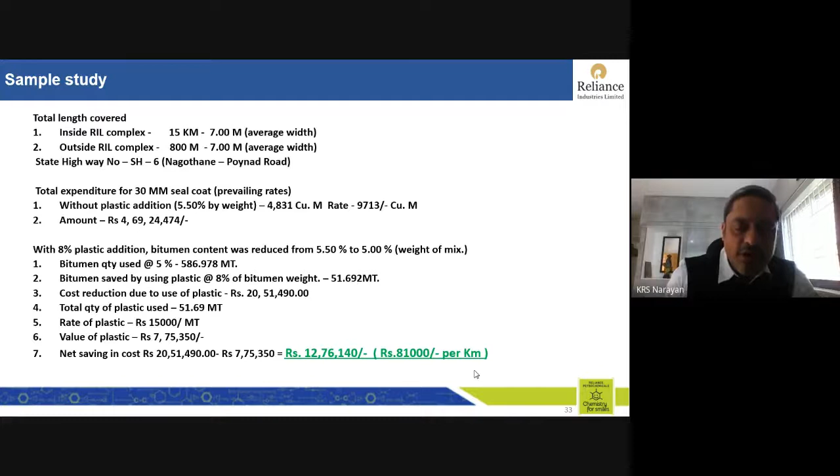Key learnings: not a single pothole. First year we had 350 centimeters of rain. This year we had 375 centimeters of rain. So we have not had a single pothole in the roads. None of them got repaired. Heavy duty multi-axle vehicles are moving. And you know, Reliance, even during this COVID pandemic, around 90% of the plant capacity is still functioning. So we have close to 135 metric ton capacity flowing every hour in our plant. Lesser consumption of bitumen with plastic addition, no leaching of plastics, this is as per CRRI. Prevents problems of end-of-life plastic like littering, incineration, landfill choking, etc.

In this project, we consumed 52,000 kgs, that is 52 metric tons of littered waste plastic, only from our township as well as the nearby areas. We were able to utilize that shredded multi-layered plastics. Reduced cost, as I said, is to be certified by the competent authority. Maintenance cost is definitely going to be very, very less over a life cycle period.

I'm told, because in the last 2019 budget, there was an allocation of close to 45,000 crores for the annual repairs of roads. 45,000 crores to 50,000 crores every year is the government funding for repair of roads. What if we could avoid 1 year's repair charges? We are able to save close to 45 to 50,000 crores to the exchequer, which could be utilized for various other developmental activity in the country. So this was a most important premise which we wanted to make.

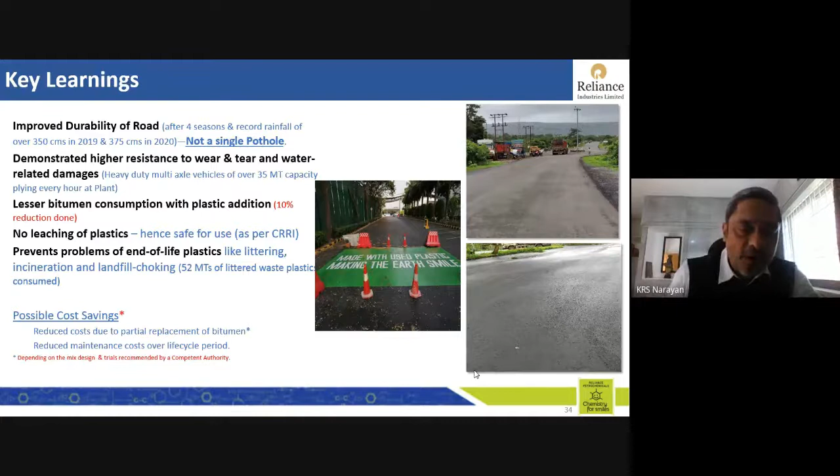Some of the case shots. Based on this, as I said earlier, the availability of the material is a big question mark. So based on all these initiatives which we took, we dared to launch a branded product for shredded waste plastics, the first of its kind in the world. Reroute is its name, and this is to assure quality and correct specifications and availability throughout the country in every Zilla.

We collaborated with the CRRI for testing. We are working with the Indian Road Congress to modify the existing code, working with the National Highways, predominantly with the Executive Committee of the National Highways, in providing a lot of recommendations to them to use plastic waste and to carry out demo projects in the country. We are also involved in some pilot projects which are going to be initiated with the National Highways and others.

And to address the dispensing of these shredded waste plastics in roads, we have collaborated with Ammann India, erstwhile Apollo plant, Ammann Apollo. We have tied up with them for auto dispensing of the shredded waste plastic. So for example, we pack it and give it to them, and this is put inside a machine which is connected to the drum mix plant. This will be auto dispensing the shredded waste plastics, such that manual intervention as well as the flying away of these thin waste plastic materials in windy conditions don't occur.

So we are tied up with them, and one trial is about to be set at Noida. Another one is coming up before December on the Bombay-Nasik highway. So this will be demonstrated for the first time again in the world. And this will provide a solution for reducing the human effort in dispensing these waste plastics in road construction.

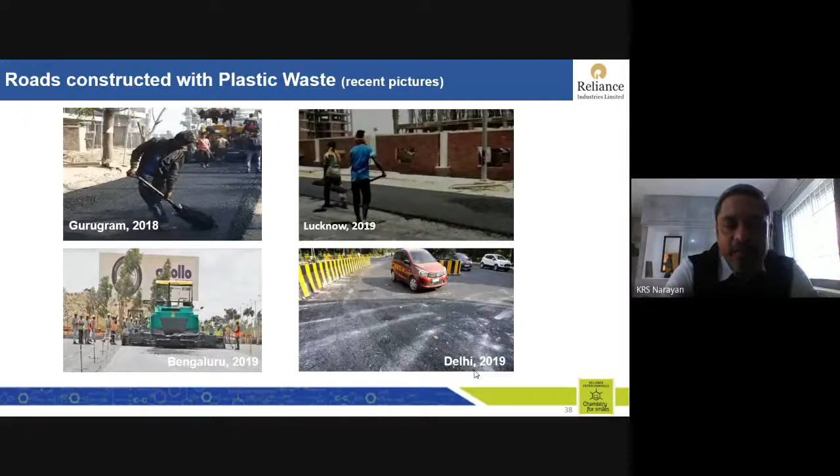Recent pictures of some roads at Gurugram, Lucknow, and then Bengaluru, as well as Delhi. Some of the roads have been built with waste plastics recently. We have now collaborated with CRRI to provide the first of its kind comprehensive testing of shredded multi-layered plastic in the world. So this would become a very, very important article which will be published by the CRRI.

And this is the evaluation of shredded waste plastic coating on aggregates. Because we wanted to find out what was the temperature at the drum mix plant. This is a practical solution which we want to offer. So we wanted to see at what temperatures the multi-layered plastics were actually melting, as simulated at the drum mix plants. So we try to simulate one inside the CRRI itself. We are working on that.

Evaluation of properties of mix with addition of 6 and 8% of shredded multi-layer plastic. We also are evaluating the properties by substitution of bitumen by 6 and 8%. We are also testing scientifically on the leaching of microplastics in subsoil. Technically, there is no leaching, basically because this 30 mm top coat is done only on the top of the surface.

So the microplastics would find it very difficult to enter the subsoil, because there is close to some 350 to 650 millimeters of subgrade, as well as the grades of soil, as well as the aggregates which are provided as a base layer for the road construction. So it will find it very difficult, but a scientific research study would be helpful to submit to the government.

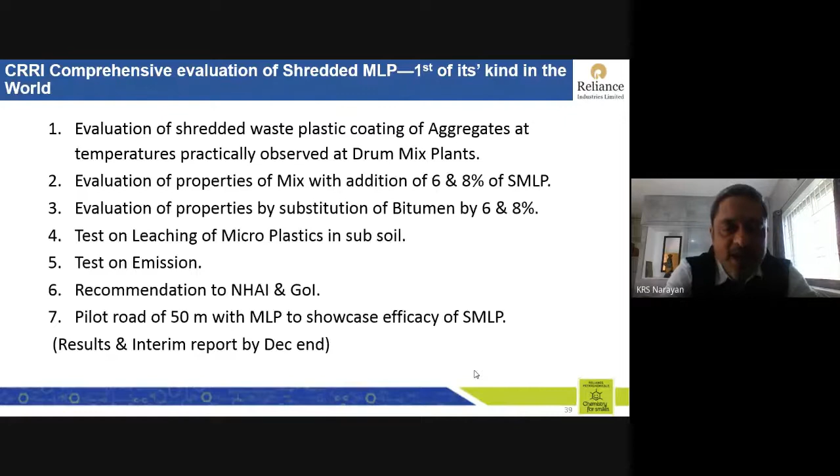And he has also propagated the use of new products, new technologies, sustainable materials for use in road construction, such that you will have the deployment of various new technologies, various new products, and also ensure the durability of roads goes up. So this is the emphasis by the Government of India itself.

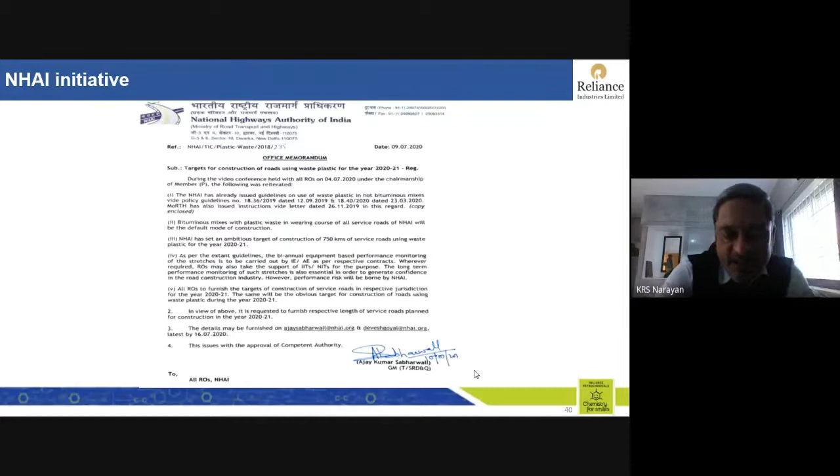Because of which in July this year, there is an initiative which has come from National Highways. There is a circular which has been circulated everywhere that everybody should start using waste plastics. The National Highways already issued guidelines, but not many people had taken use of this. So again, this has been issued that they have to target 500 kilometers, 750 kilometers of service roads of national highways using waste plastic for the year 2020-21. So this is very, very crucial for adoption on every national highway road which is coming up from 2021 onwards.

Vision. The National Highways has just put out a vision last month of eco-friendly highways. While using plastic waste in highway construction, 1 kilometer of 4-lane highway helps in disposal of approximately 7 tons of plastic waste. So 1 kilometer of a 4-lane expressway would consume 7 tons of plastic waste.

It means to say we are building close to some 40 kilometers of national highways every day. So 40 kilometers of national highways every day would take around 14,000 to 15,000 kilometers. That is approximately close to a lakh of tons of plastic waste that can be disposed through only national highways.

There are various other city corporations. There are various National Rural Road Development Agency, PMGSY projects. There are various bodies which are putting up roads on a daily basis, on a monthly basis. So they have targets. They all can start using it with the help of this initiative by the national highways. So there is a lot of utilization of waste plastic which will come in the near future.

And as engineers, we would like to work with sustainable materials, sustainable technologies, and sustainable products to ensure that the durability of our roads becomes greater. So quickly, I would like to tell you that for 17 years, I was working with fiber reinforced concrete in Reliance Industries before taking up this assignment. I was working with Recron 3s fibers, which can be used to promote the durability of concrete roads and national highways. We are proud to say close to some 3,000 to 4,000 kilometers of national highways have been built with fibers.

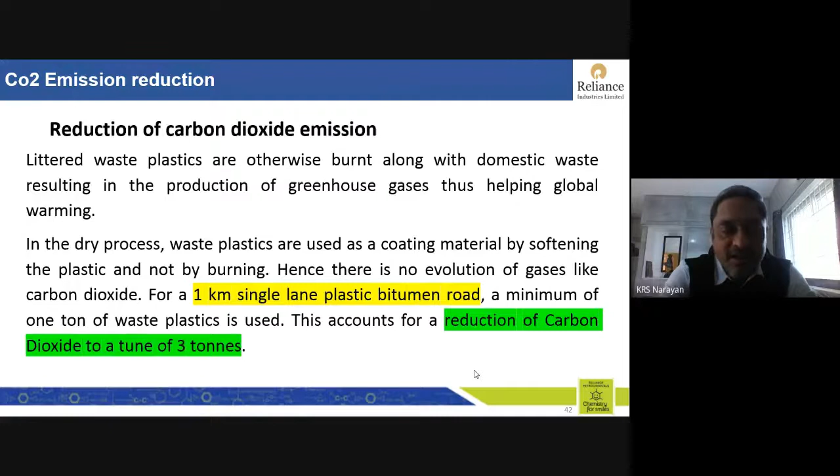So we have millions of metric tons of CO2 in India. And the Prime Minister was very vocal in his statement that the whole country should become carbon emission neutral in another 15-20 years. Major economies around the world have set ambitious targets for reducing carbon emissions to nil in the next 2 to 3 decades. So by using waste plastics, we are in a large way reducing the CO2 emissions to the atmosphere. Even a small 1 kilometer single lane plastic road has a reduction of 3 metric tons. So there's a long way to go for us.

With this, I end my presentation, and I just wanted to add that whenever you have chips or chocolates, when your doctor keeps you fit to have them, have it, but don't throw these, don't litter these. It can be very helpful for us to make durable roads.